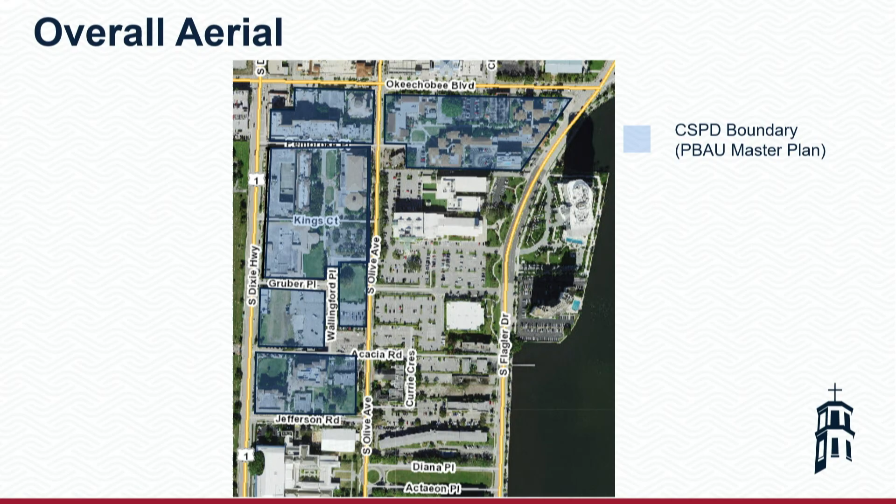We're all familiar with PBAU, one of the great assets of our city. They are part of a CSPD, a Community Service Planned Development, which is highlighted in blue, and the particular site within the CSPD is the one outlined in red. So as a reminder, City Commission approved a 25-story dorm to accommodate 990 students, an 11-level parking garage with 888 parking spaces, an increase in the student enrollment cap, 4 waivers, and the last bullet point is why we are here tonight.

The condition of approval requires a major PD amendment to, quote, improve the facade of the garage. And we have been working with staff since April, and we join with staff tonight with an agreed upon design, or largely agreed upon. A few issues for you to provide direction on, Mr. Chair.

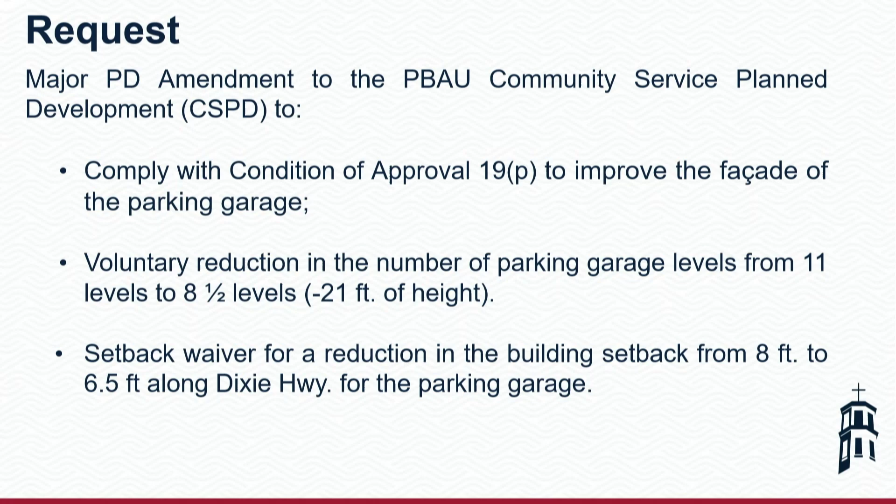Again, we are here primarily seeking direction on that facade improvement. Also, we are voluntarily proposing to reduce the height of the garage from 11 levels to 8.5 levels. That's a 21-foot reduction in the overall height of the garage. And the screening requires columns that are in an 8-foot setback on Dixie Highway that generates a waiver. So this is the site.

Let's talk about the design. So first of all, let me share with you what the geometric design element is on the garage. It is an ichthys symbol, which is also referred to as a Jesus fish. It's a symbol from early Christianity, it's been around since the 2nd century. It is elsewhere on the PBAU campus, as you know it's a Christian university, so there are many examples of this on the campus. In fact, it was the city's art life director, Sabile, who walked the campus and said, why don't you use that ichthys symbol on the garage, which of course we thought was more than appropriate. So that is within the geometric designs that you are about to see.

So this shows what was approved, what's being proposed, and the delta between the two, a reduction of 2.5 levels. We do lose 185 parking spaces, which does matter, and I want you to be aware of this. The reason the garage was designed at 888 spaces and 11 floors to begin with is because we have parking requirements with the city, and they were asking us to make the parking whole on the campus. The new business building that's topped out took away parking, this dorm project takes away parking, and we've lost on-street parking due to abandonment of roads.

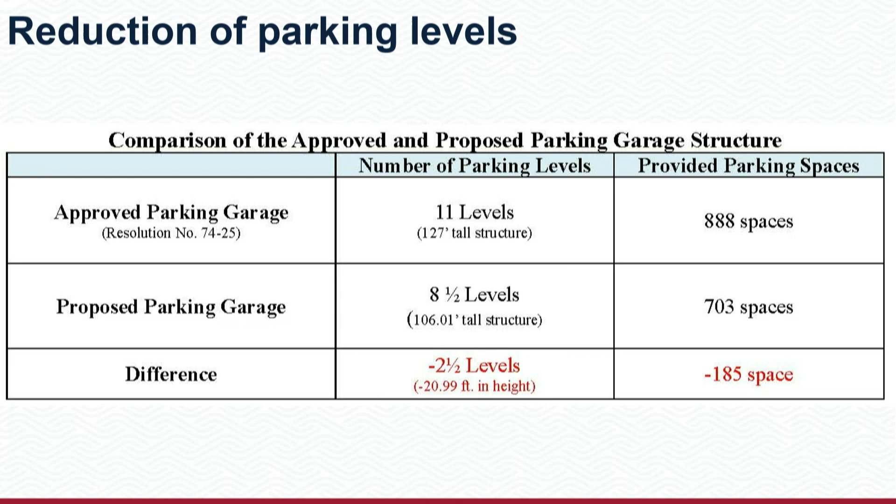So we're coming back knowing that we're losing 185 spaces. We're somehow going to have to make up for that elsewhere on the campus in the future. But we did want to reduce the height of the garage on Dixie Highway, which is very much in the public realm.

So the west facade facing Dixie Highway, this is the architectural treatment that has been proposed. And you can see the ichthys throughout the designs. Again, this was a recommendation from Sabile, which we think is a terrific design.

The north facade of the parking garage, which faces one of the side streets, and the south facade each have partial treatments. This is Dixie Highway. We've treated it about 2/3 of the way east. And then we have to leave open ventilation so that we don't have a mechanically ventilated garage.

Remember, this is a 100% affordable housing project. So there's a budget on doing this. This is not a luxury high-rise where we can put all the gingerbread that we want to. We need to make this as beautiful as we can within a budget for dorm rooms that students can still afford to pay the rent on.

Now, that is going to be a subject of discussion this evening because staff would like this eastern 1/3 of the north and south facades also ornamented or decorated in some way. And we think we've reached agreement on how to do that. We couldn't add to the budget, so we're going to rearrange some of the ornamentation so we're not paying for more of it and reappropriate it over so the entire north and south facades are covered.

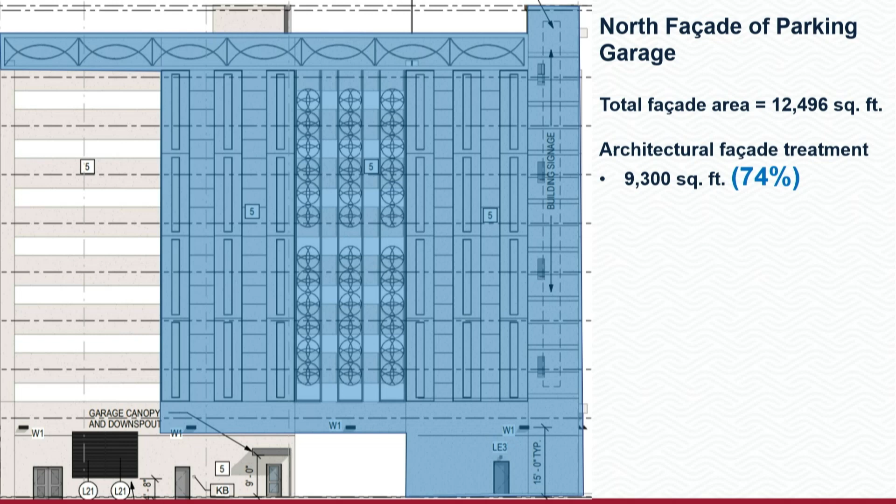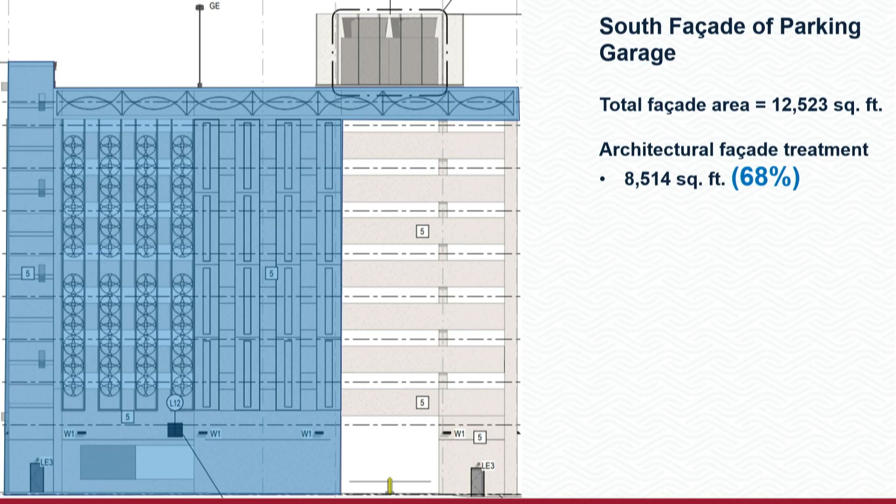Similar issue on the south facade, the eastern 1/3, which is the least visible from the public, by the way. You kind of need to be on the side street to see it for the most part. Everything in blue already has ornamentation. The goal tonight, or at least before City Commission hears this, is to satisfy staff that we're covering 100% of it.

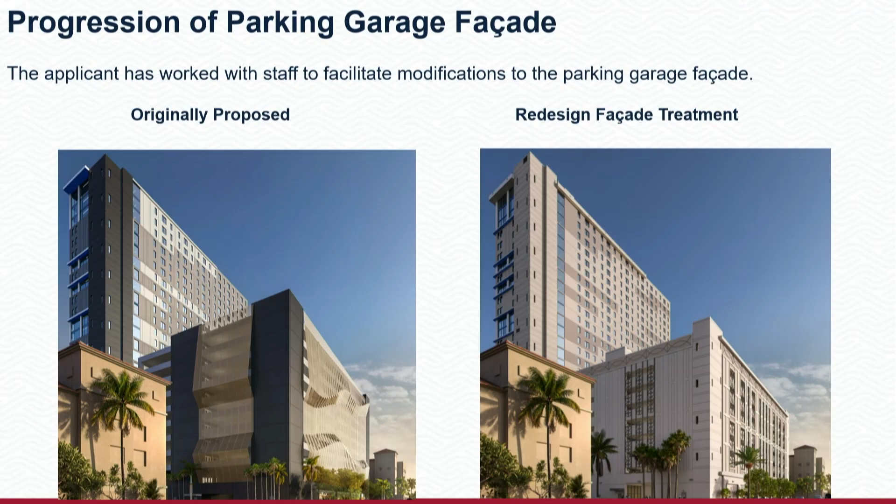So on your left is the original proposal that came to you, and there was a lot of commentary, including from this board and the City Commission, about what is appropriate decoration and coloring. On the right is what is in your package, which is lightening the colors on the corners, adding some holes in it, scoring, and this geometric design, while not enclosing the garage and triggering very expensive mechanical ventilation.

Here is another image of it. This is looking south down Dixie Highway, and this is looking north up Dixie Highway back towards the downtown. I can come back to any of these.

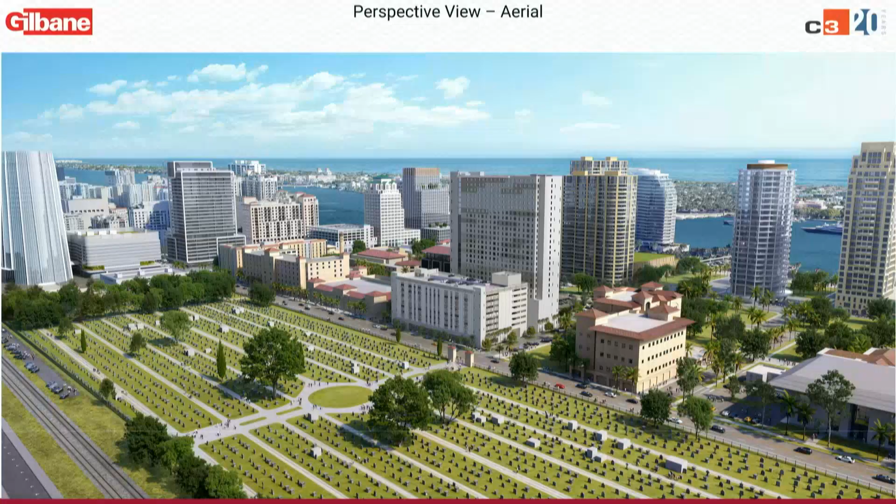This puts it in the context of the surrounding building height. If you look at the height of the dorms that were built a few years ago, the height of this building, it's about the same datum line between these buildings. And of course, we have more big buildings coming in the block to the north, not to mention the two South Flagler House buildings, the Forte building, and what will be two family church buildings under construction. So the height really wasn't a big concern except for the garage on Dixie Highway.

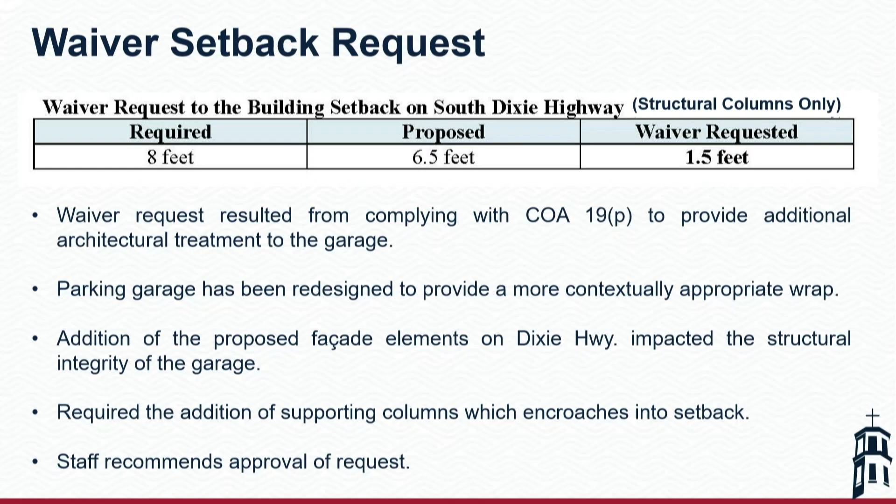The waiver setback request, which I'll better illustrate in a graphic—we have a required 8-foot setback. A few of the support columns are within that. It's in a landscaped area. You'll still have the same amount of landscaping, so whatever the required number of hedges were, you'll still have that. It's just there will be some columns in the middle of the hedges. This graphically depicts it better. So working left to right: Dixie Highway, then a landscaped area, then a 10-foot sidewalk.

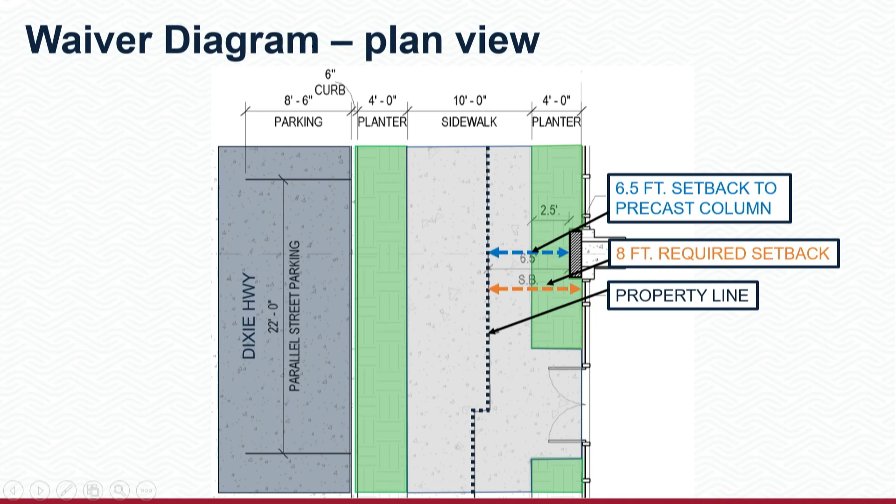None of that goes away, so the public realm is all the same. But in this 4-foot planted area, which is the second layer of landscaping before you get to the garage building, we are supposed to have an 8-foot setback. Where these columns jut out, we only have 6.5 feet at the worst point. There are lesser encroachments, but the greatest encroachment is 1.5 feet, and that occurs in about a half a dozen places.

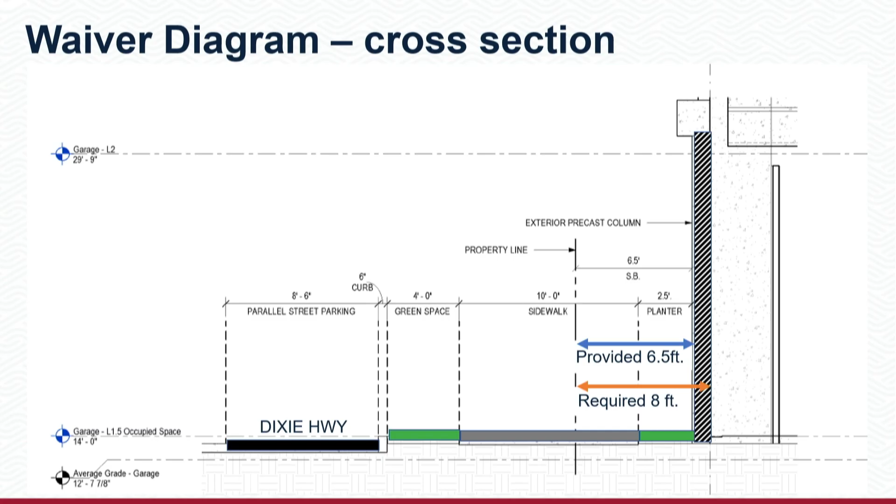This gives you a cross-section view of the same thing. It will not change the public experience on the roadway, the parallel parking, any of the landscape. The sidewalk's still 10 feet. The active use liner is still there, so the public perception of this will not exist.

So this is the Dixie Highway frontage. I'm sorry, I don't know why this keeps skipping around. This is the garage above, our active use liner on Dixie Highway. So Dixie Highway, parallel parking, 4 feet of landscaping, 10-foot sidewalk, what should be another 4 feet of landscaping, but where these columns come out to support this is where we're seeking the waiver. Staff supports it.

Now let's talk about the 3 conditions of approval that are in your package, and all of these pertain to the garage aesthetic treatment. The first one is that the staff wanted to extend the treatment on the entire north and south elevations, which we are committed to doing. We just need to find a way to do it without exceeding the budget that has already been set.

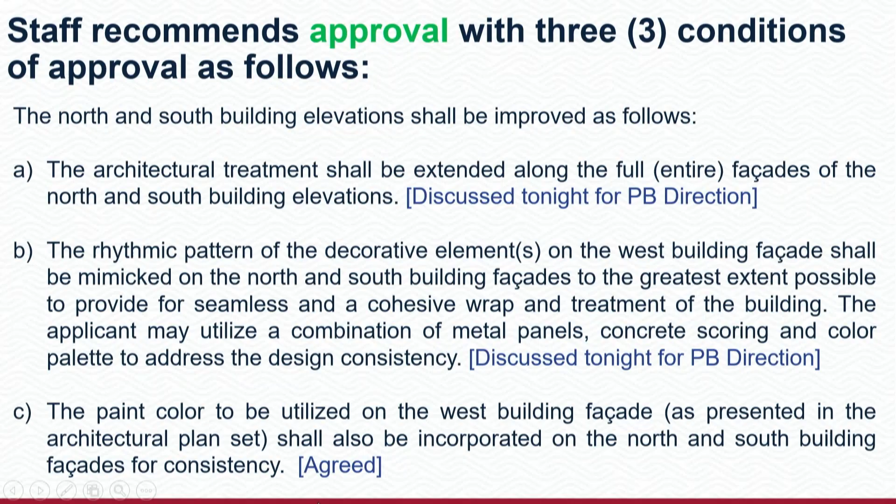Second is the rhythmic pattern, which I'm not sure we're in agreement with staff as to which columns of geometric designs get moved to where, but we will work that out before City Commission. Delighted to have your input on that, should you have any input. And condition C, that the paint color will be the same. We agree to that. That was always the intention. It just didn't always show up in the illustrations.

With that, Mr. Chair, we're concluded. Delighted to answer any questions you have. You may want to hear from staff first. Let's first see if there are any questions. Sam, any questions? Not right now, no. Debbie? Will, not likely to have questions.

You know what I'm going to ask about. So why the decision to reduce the 3 stories for parking? Was it budget reasons or? I don't know all the reasons, Will, is the short answer, but all of our neighbors supported the 11-story.

But I think we felt it was awfully tall in the public realm, even though we were trying to honor one part of the code, which is the parking ratio in the code. We're also cognizant that we want to be a good community citizen. We want to have an attractive campus, and it was feeling large. So we asked our design team, who's present tonight, if they could go back and redesign it at a shorter height, lose as few spaces as possible while they were doing this decorative condition of approval that we knew we had to come back for. And this is what they came up with. We hate to lose the spaces, but frankly, we think it looks better being 21 feet shorter.

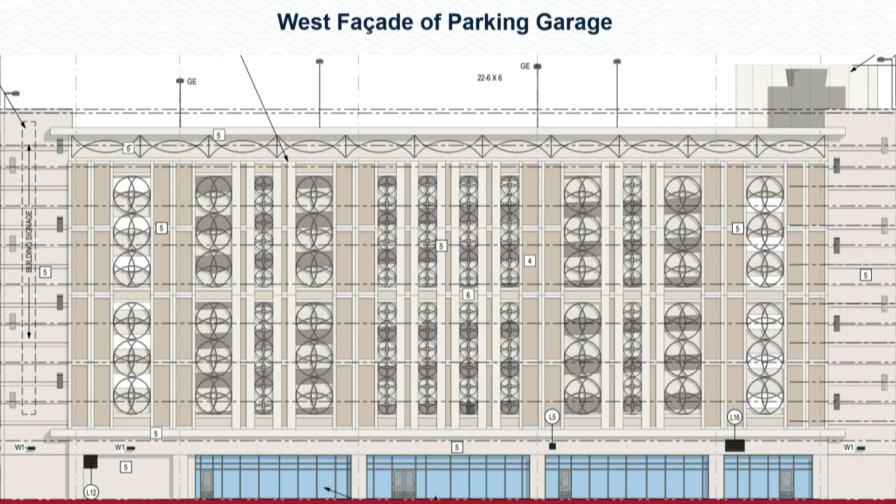Okay, my second question is relative to the waiver. I'm assuming, though it doesn't appear so in what's been represented, that the setback encroachment is not affecting the visibility triangles at the corners of the parcel. No, the columns are all interior to the west elevation. They're not at the corners. Thanks.

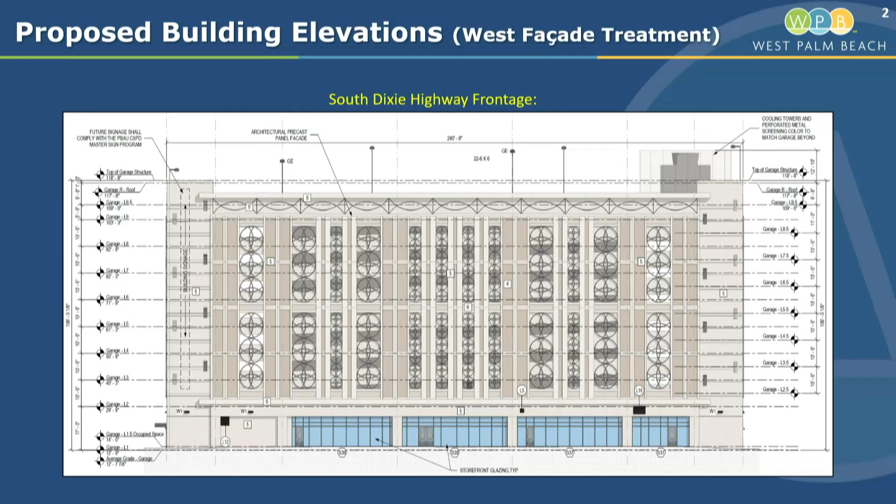They are using, as Mr. Mayfield questioned, these panels applied to the facade and the metal work that provides good articulation. Staff has worked with them but has some concerns regarding the treatment of the north and south facade. These facades are very visible as you travel Dixie Highway in both directions, and that's why staff has concerns about how the treatment basically stops at some point and doesn't continue across the facade. We recognize Dixie is probably the most important side, but we'd like some treatment that provides context to the entire building.

We have worked with them. If you look at the portion in the middle of the facade, it's a shear wall that is part of the structure, so this element won't have the precast panels applied to it, just scoring creating the pattern. We thought that could be a good option to not increase the cost they were concerned about, while still providing some articulation and context to the north and south facade.

At this point we are just requesting some conditions of approval so we can continue working with them on how to make this facade consistent. We have some ideas and have been back and forth with the architect, but we have not reached an agreement yet. The goal is to provide some continuity to the north and south. There were some discussions about maybe removing one of the elements on the west facade to be able to use it on the north and south.

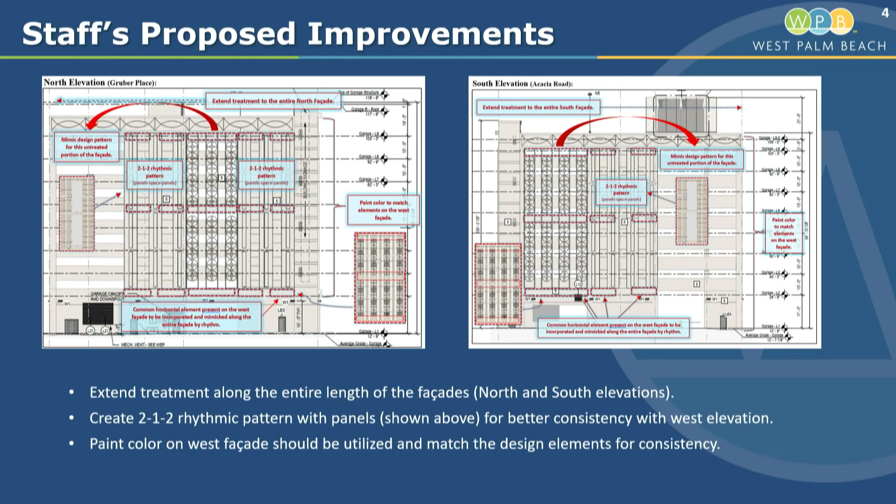And if the rhythm of the panels are more consistent with the west facade, we can work with that and provide a more complete look. So we would like to request some additional time, which is the reason for the conditions of approval. We offered some suggestions, but we have not really reached an agreement on how to solve this.

We support the reduction of the building height and the number of parking spaces, and we support the waiver request for the building setback. That's some give back for the treatment they are able to accomplish. But the north and south facades are where we're still working, and would like a little more time to resolve it before it goes to City Commission. We're looking forward to the board's perspective, but staff's intention is to have a complete building so it looks like a full volume.

The recommendation is approval with conditions. Staff believes it complies with the standards in Section 9432A and Section 9435C for design qualitative development standards. We have, as mentioned, three conditions we would like to recommend for approval so we can continue working with the applicant. That concludes the staff presentation.

Okay, thank you. Debbie, let me start with you. Any questions? Sam? Is there any treatment on the garage on the elevation that faces east?

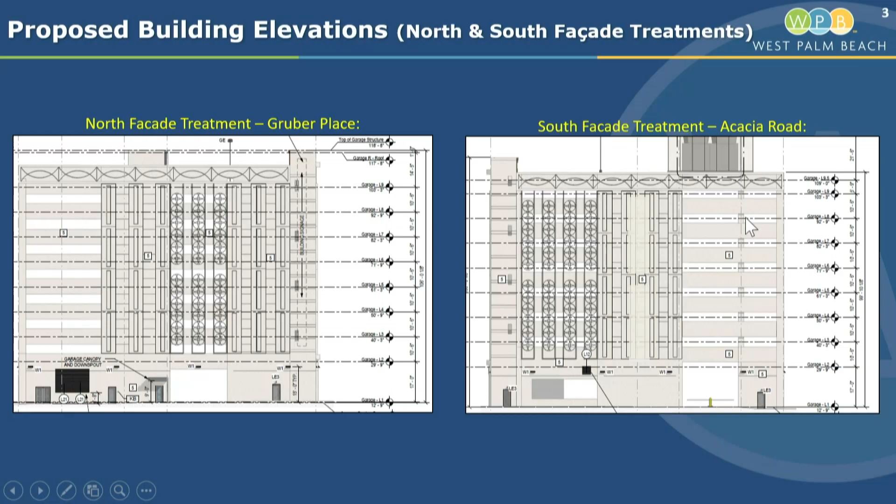No, I believe it will just be like this treatment here, right? Yeah, so it's facing the building, totally interior to the project. So they are having just this, basically the crash wall and nothing else on the east elevation. It's attached to the building, or it just faces the building? It's separated, so there's nothing on that wall. It's a service road between the garage and the residential. Okay.

Was there, maybe that's a question for the applicant, but was there a reason why the application was changed from the original design to this design? Was that a city request, or was it something else? You mean the original treatment of the garage? The garage design, well the facade treatment on the garage, was that the city requested that it be changed, or was that something the applicant changed on their own?

The city requested it. It was a condition of their approval that they had to change it. You mean this one? Yes. So this is what was shown, I think, to you. I was not at that hearing, but it was shown to the city commission.

It had sort of this wave feature, and the city commission approved the 25-story dorm, the 11-story garage, but said we're not sure we love this screening. Will you please work with staff and come back at a later date with something that looks different? We weren't sure what that was, quite frankly. It's in the eye of the beholder, but they did not love it.

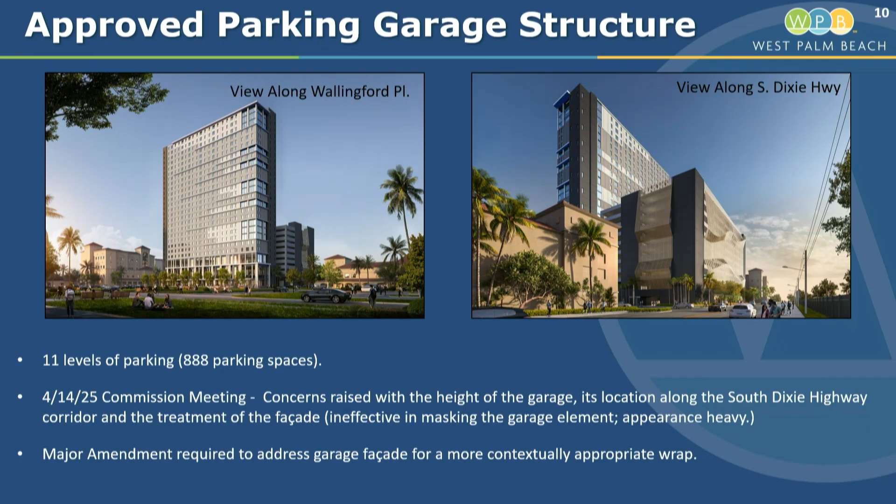So we worked with Sabile, the city's art life director, and asked her for her suggestion, and she came up with what is before you tonight, which we actually like much better, and so does staff. So if you're asking why we did not present that in the first place, we took a standard garage screening and proposed it. But we've always been open to a different design. We just need to make it affordable.

Got it. Yeah, I just didn't know if it was the city's requirement or whether it was just changed for other reasons. I wouldn't call it a requirement, it was city staff's suggestion. And we worked back and forth with them, and we're happy with it. They're happy with it too. But if you're asking where did this original one come from, I think it was more of a standard garage screening.

And the city wanted the screening, and so did we, to somehow be related to Palm Beach Atlantic University, not an off-the-shelf one that could be in any city in America. We had even thought about putting the sailfish, which is PBAU's logo, but I don't think anyone wanted a giant sailfish on the side. So this is what we came up with. Got it, okay, thank you.

We have staff back, thank you. Thank you, any other questions of staff, Sam? Yeah, I was just curious, I'm sorry. Okay, go ahead. The space in between the parking garage and the dormitory, you said that's a service road, is that right?

Yes, okay, that was my own, just wanted to clarify. Thank you, Will.

Going back to the previous pictures, it looked like there was significantly more open space for airflow, so I'm a little confused. Are these panels all solid concrete on the facades? The center panel has always been a solid panel, and the two sides are the crash wall for the cars, with the space between the slab and the crash wall always open. The treatment will remain the same, it's just the metal work applied to it.

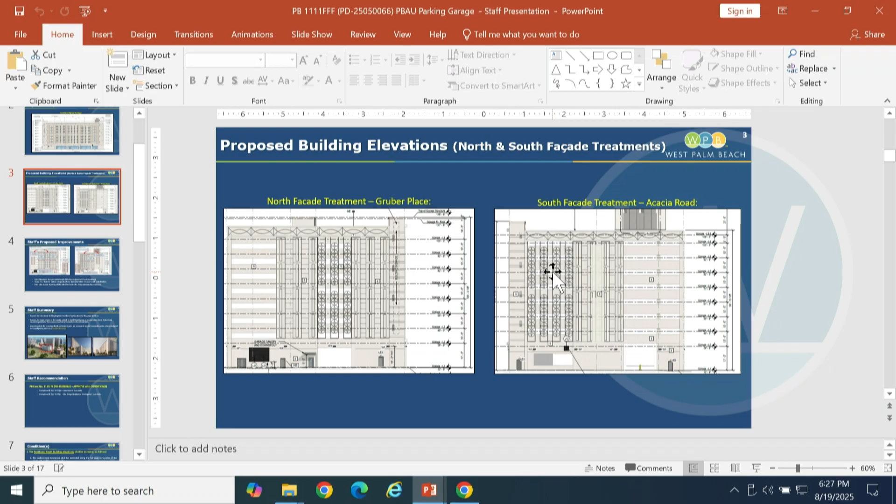So in your condition for approval, it says full on the north and the south? Full means we want treatment all the way to the end. Here you see some metal decorative elements, and we're working on scoring lines on the center panel that mimic the treatment on the west elevation. Something needs to be done so the facade looks complete, not stopping halfway. That could either be decoration or mounted panels. I think the idea will be decoration, not to reduce the flow of air.

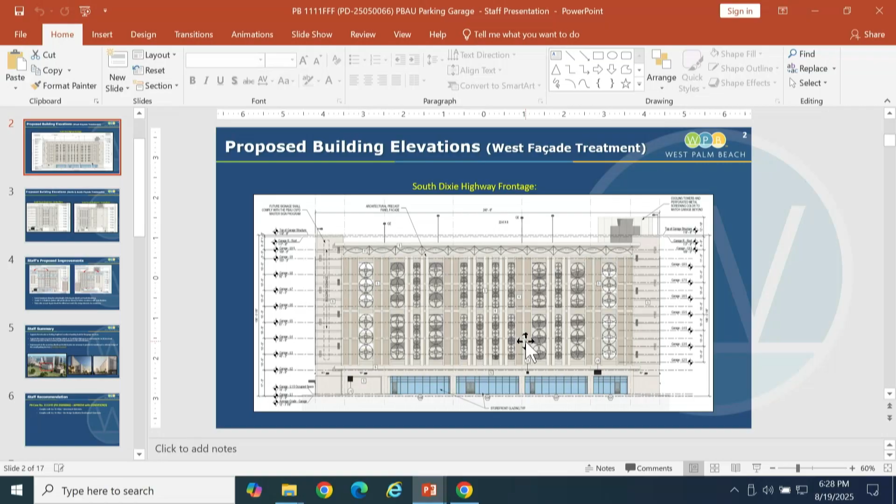So how do we space those? Would they have to incur the cost of creating those fish-style patterns for the entire side of the structure? That's what we're trying to work out, with the idea that they don't have to incur the cost of creating new panels. Some options were using these to distribute throughout the entire facade, and maybe remove, for example, this one in front on the west, which we think won't impact the overall appearance, and distribute to the other side to create a more cohesive front. So we need a little time to work it out.

We don't want to do something that brings down the look of the west facade. So we want to try to distribute it, that's why we're talking about the rhythm of the scoring lines on the solid panel. We make them a rhythm consistent with the west, which looks better, and maybe if we add the decoration, the metal elements, in a certain pattern on the north and south, that will be sufficient with what we have to complete the whole design.

So right now, across the street from the spot is the construction trailers, and it looks like some sort of air conditioning mechanical equipment. Is that area going to be developed at some point? Eventually, yes. So that side of the building won't necessarily be as visible a few years from now? Yes, so that's why we're saying it's not as primary as the west, but it's still visible and will be impactful. So we're doing a lesser degree of treatment, but still something.

On the north side there's a service alleyway, and then the beginning of the dorms or the library. But you have an 8-story building just to the north. This yellow structure to the left. How many stories is that? This building, it's a gym with a second floor, so it's a large structure, not a 2-story building.

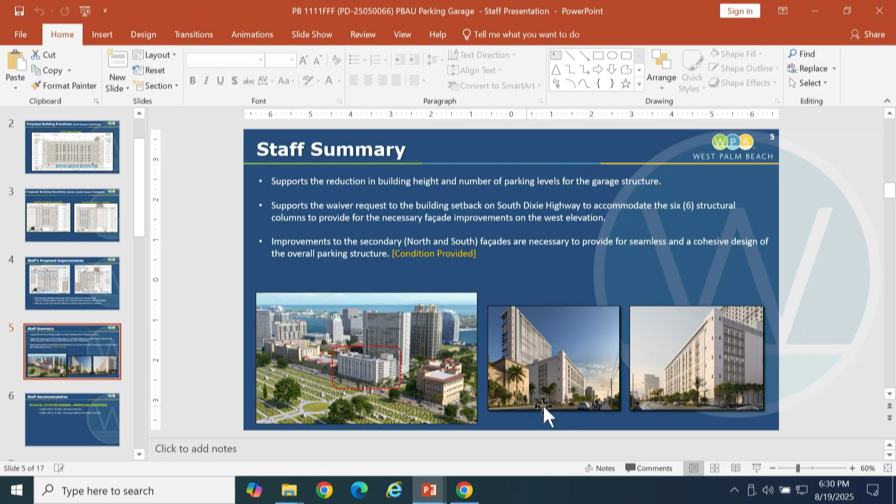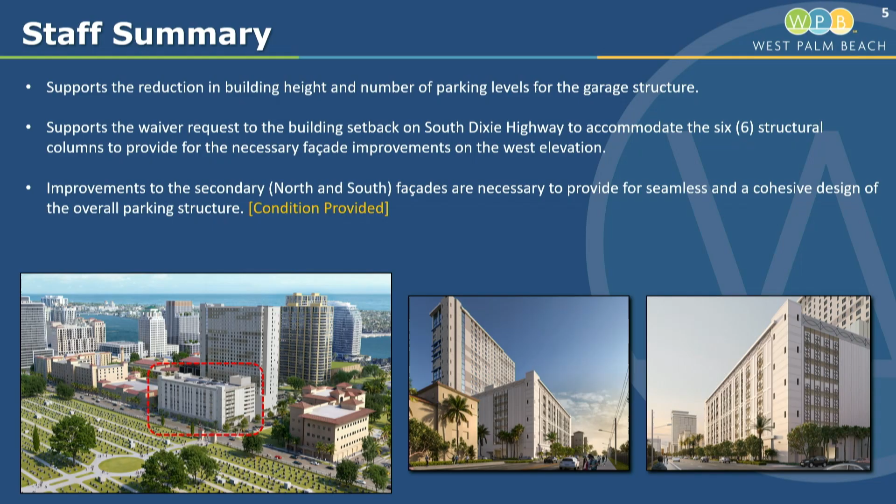Okay, so I'm just trying to think of line of sight, driving down the road at 35 miles an hour. How important is it for the entire side of the building to be decorative versus it being a want versus a need? And what's going to happen a few years from now, especially on the south side, when that lot is potentially developed as well?

So just sticking on the word full, if it's predominantly, but it sounds like you guys are open to compromise. Can I direct a question to Harvey? Let's, this is a chance to ask questions. I'm sure we'll reserve time to answer any questions at the end, but let's stick with the questions of staff.

Okay, any other questions of staff? No. All right, Patrick. Jean, I have a question.

It sounds like the applicant is more than willing to consider a lot of these ideas so long as the overall cost won't go up. Is the staff comfortable with that constraint? In other words, do you believe without increasing the cost, you could come up with a better outcome?

We will do our best. We can work with that.

Okay, well, I think that's important because I think we give the direction that we want them to continue to work with staff, at the same time cognizant of the need not to increase the cost because of the bond financing. I share some of Will's concerns that I would hate to see the west exposure, which looks very attractive, diluted too much for something that may ultimately not even be visible.

Okay, I mean, these are the trade-offs. I know you will balance all those, but his concern is one I would share as well.

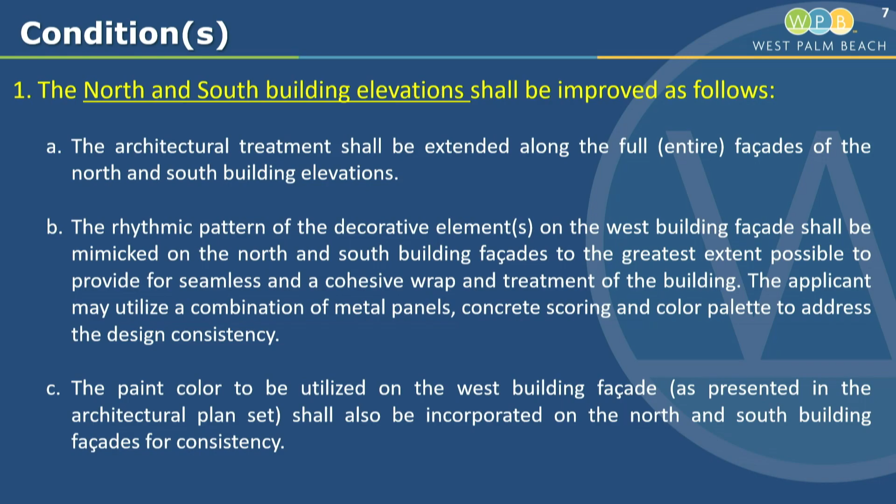Okay, so we're looking for a motion then. I'll make the motion. Okay.

I move that the planning board recommend to the city commission approval of planning board case 1111FFF, PD 25050066, a request by Joni Brinkman of Urban Design Studio on behalf of Palm Beach Atlantic University, Inc., for a major amendment to the Palm Beach Atlantic University Community Service Planned Development, modifying the parking garage structure approved by resolution number 74-25 by reducing the number of levels for the parking garage structure from 11 to 8.5 levels, revising the garage facade for a more contextually appropriate wrap, and a waiver to the building setback along South Dixie Highway.

The motion is based upon testimony presented at the hearing, along with the application submitted and the staff report, which constitutes competent substantial evidence. The planning board hereby makes a finding of fact that the application complies with the required standards in section 94-32A and section 94-35C of the City of West Palm Beach zoning and land development regulations. In addition, this recommendation is made subject to the conditions of approval contained in the staff report dated August 19th, 2025.

With the further condition that letter A is modified as follows: the architectural treatment shall be extended along the full entire facade of the north and south building elevations, provided it does not increase the current budget as allocated for the parking garage. I move that these conditions, and then condition B and C, shall apply without modification.

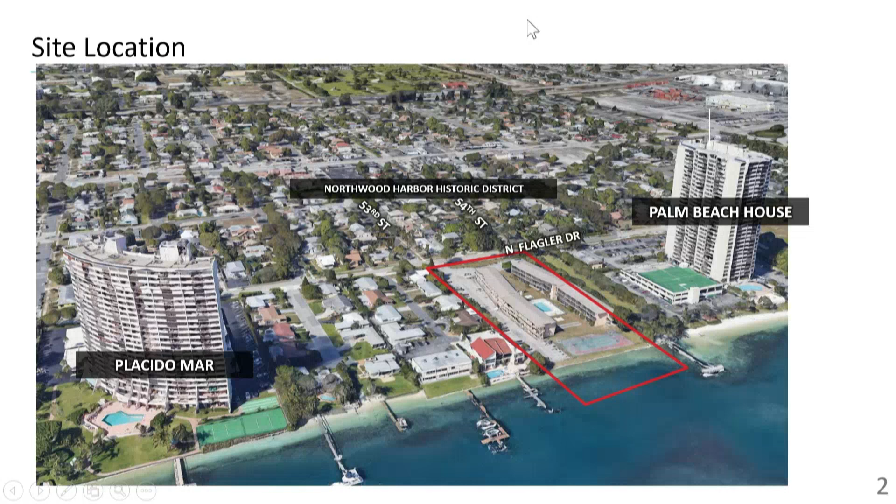So just a quick summary of where we are and the requests specifically in front of you this evening. This is a rezoning. The underlying zoning here is multifamily 32, 32 dwelling units per acre. We are not requesting any additional units than what's allowed in that zoning district.

What we're asking you to do, which you've done on other projects up and down that corridor, is a residential plan development, an RPD. In that RPD, we are asking for a formal level 2 site plan, and that has basically 4 waivers associated with it.

So a little bit about Great Gulf, who's our client here this evening. They're in the audience. They are a Canadian firm. They also have a significant footprint all over the United States, including owning a home building company called Ashton Woods. But here in the city of West Palm Beach, they are not new. In fact, they were one of the pioneers of the Renaissance we're seeing now. Way back when, many of you will remember the 1515 building, it was called the Modern.

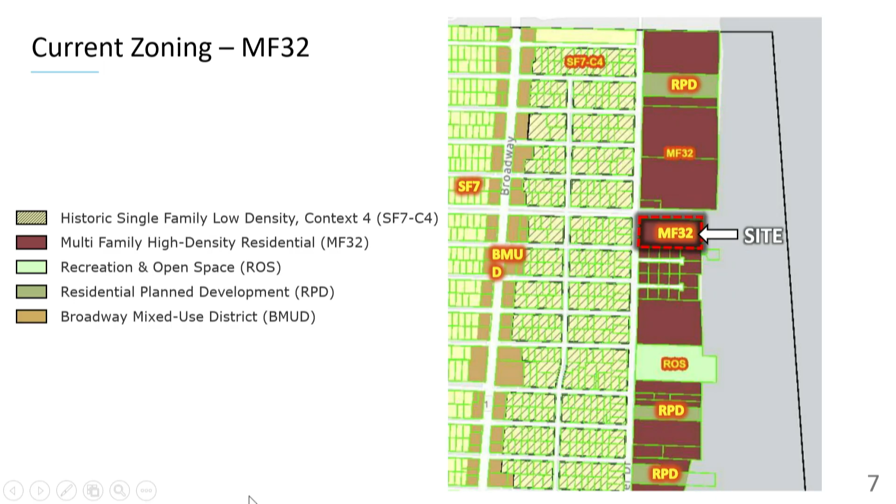The zoning on the site today, as I said, is MF32. The request is to change it to RPD, or Residential Plan Development.

This is the development program. Existing today are the Poinsettia apartments, constructed back in 1966. There are 2 3-story buildings and 72 units. Our proposal is to go to 97 units in a 31-story tower.

Now, the addition of those 25 units are allowed under the zoning regulations. We are not requesting a land use change or an upzoning. We're requesting to use what is out there or allowed today.

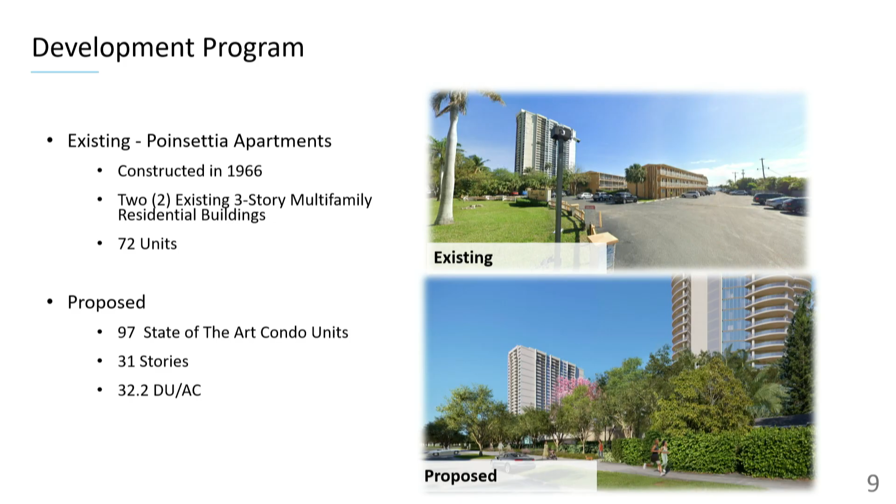Starting on the left-hand side is the Palm Beach House, which sits at 31 stories, 280 feet. Our proposed is 31 stories, and then immediately to the south of that is 26 stories for Placido Mar. And then you'll note Apogee, which is already approved at 235 feet, and Olara, which is under construction today.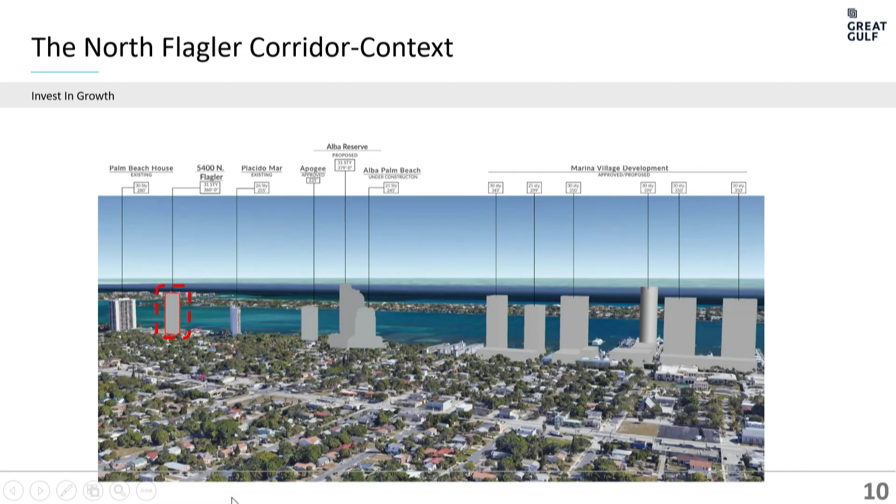Well, give Great Gulf credit. They said this lot is 220 feet wide, 600 feet deep. We could do something different. Mr. Safdie said, well, let's not look at the way this goes. Let's do a podium, maybe a 2-story podium, and not do internal ramping within that podium so we keep the height down. So that was the design we started with.

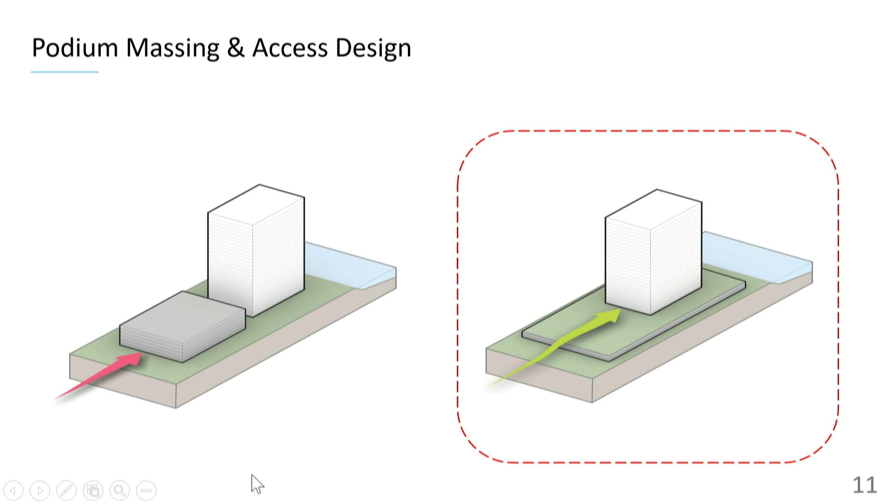Then we looked at, okay, what is allowed today under the zoning, under MF32? On the screen in front of you, on the left-hand side, is a by-right building that can be constructed. It's 150 feet of height. Ken, how do you get a building 150 feet of height in MF32? The answer is simple: it's a 220-foot wide lot. The way the code works, you take the height of the building, you divide by 2, and you have to have those setbacks. This building is 70 feet wide. It could be 150 feet high. So that's what's by right.

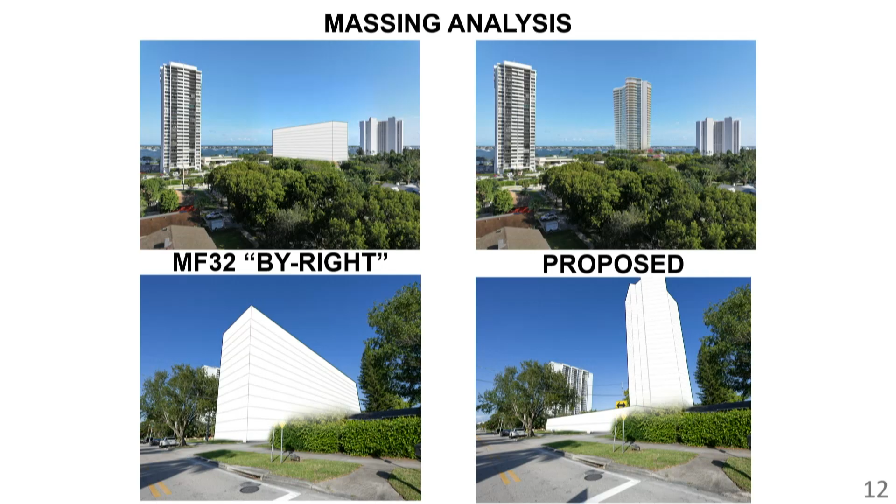On the right-hand side is what we're proposing. Different, slender, a taller building, obviously, at 360 feet, but a unique design. Now, these are just massing diagrams. I'm going to walk you through the details of the actual building itself. So this is the first slide of the building itself.

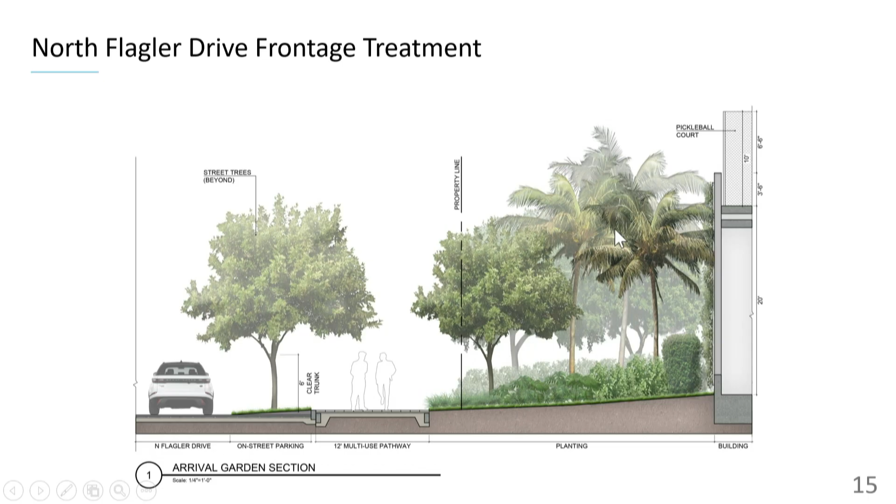My purpose of showing you this is we can put a significant amount of landscaping to address staff's concerns. We're absolutely happy to make this a green wall so that blank wall concept won't be there. We don't think it would be seen with the amount of landscape we're proposing, but of course we're willing to make it a green wall. Our client was very considerate of that and certainly said that made sense.

It's also important to note we're providing a 12-foot multi-use access, a pathway throughout the site, consistent with the vision for that north area. The residents are excited about having a wider pathway. That pathway will also have a significant amount of shade. That's our approach - we're going to make that a comfortable walkway with shade and make sure it's very comfortable for folks to walk on.

This is the building itself. It is 360 feet of height. The building consists of 31 floors. As I indicated earlier, 2 floors are parking down here. There are townhomes, one on each side, that actually start on the ground floor. And then here's the building itself. Its slab-to-slab height is 11 feet.

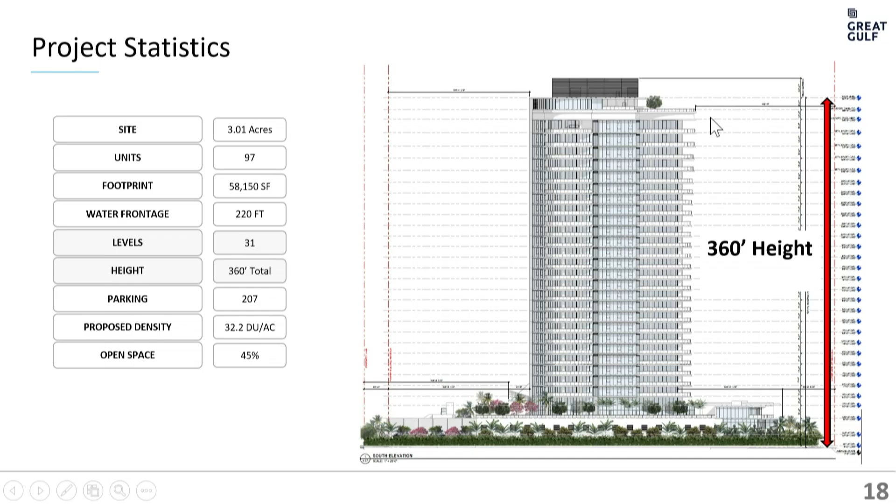Also you'll note the setbacks to the tower element - 170 feet from the front, 143 feet from the back. The building itself meets the RPD requirements of 20 feet, and then we have the setback to the north to the tower element, which is 30 feet. Now I need to let everybody know this building does get a little bit wider as it gets taller - it gets about 8 feet wider, and it's a consistent growth of the building. It's just a neat design.

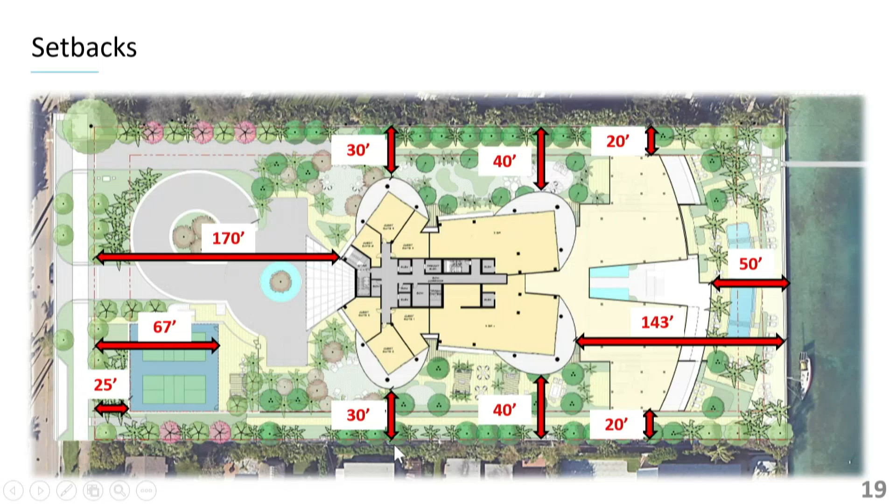And so here are the elements, and these, by the way, are measured to the balcony - a 30-foot setback from the southern property line here on the west side and 40 feet to the eastern balcony.

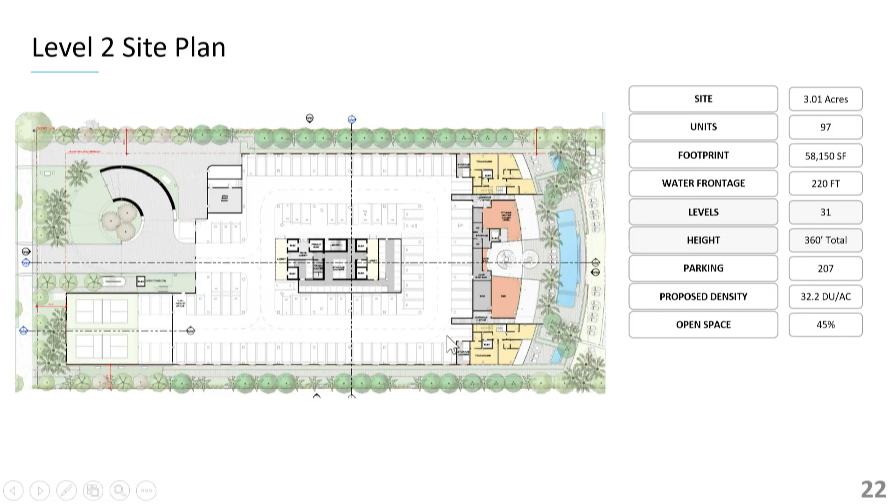This is level 2, or the arrival area. You go around the roundabout, work your way through to the arrival area, and then you go to the valet area, and then this is the main entrance into the building.

It's important to note on this slide - I'm not sure what you call this, but the tower itself, I use the word a onesie, but I don't think anybody will like that. But when you look at the tower element itself, it kind of looks like a little kid's clothes right here. And that's the tower element that we're proposing, and it goes up to the top.

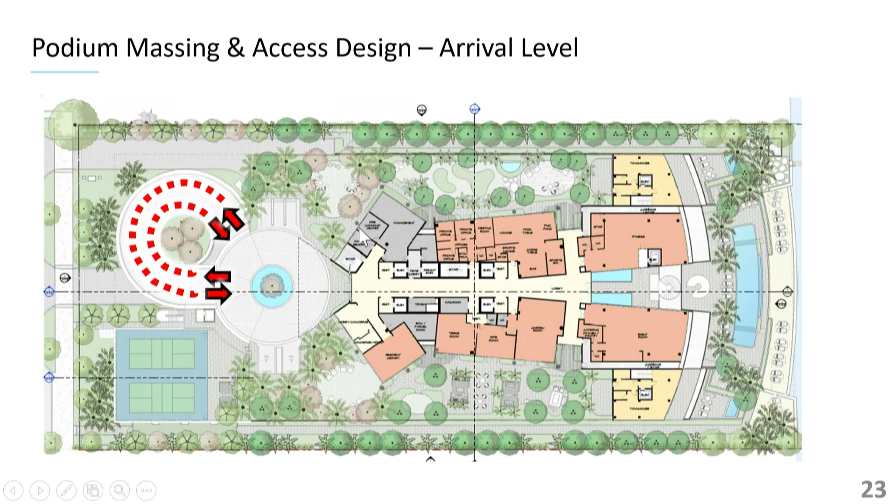And I don't think my client appreciated that term.

So we'll move on to level 5 as we move up on the podium. The podium here starts with level 4, and then after that it becomes a tower. They just build on top of each other. Each floor plate is not the same; there are different floor plates throughout. The top floor is an amenity deck. So that's the building itself.

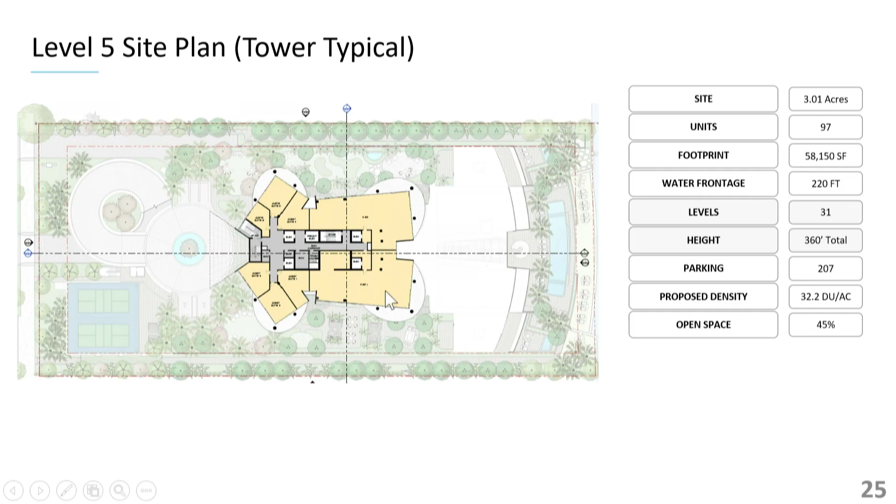So on to the landscape. We have a significant amount of landscaping proposed on the site. On the north side against the park, we meet the code requirement. On the south side, we double that code requirement. On the west side, we are an additional double plus some. We've met all the code requirements for planting, or have exceeded those requirements.

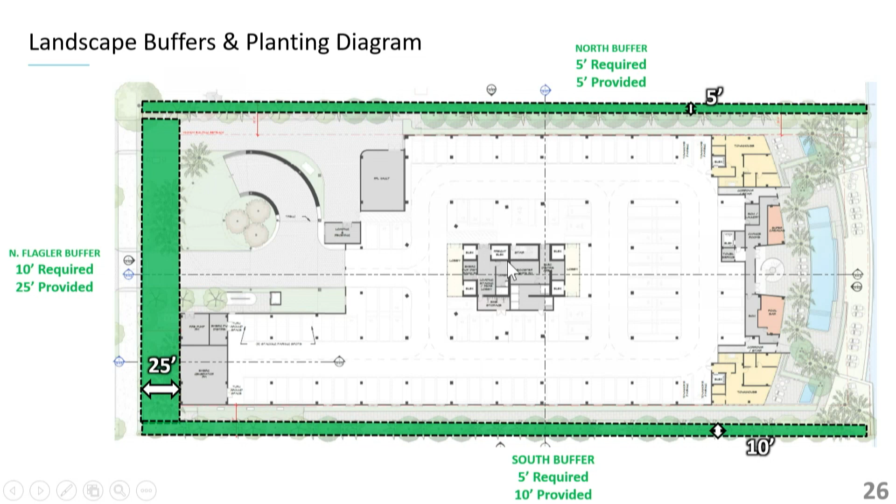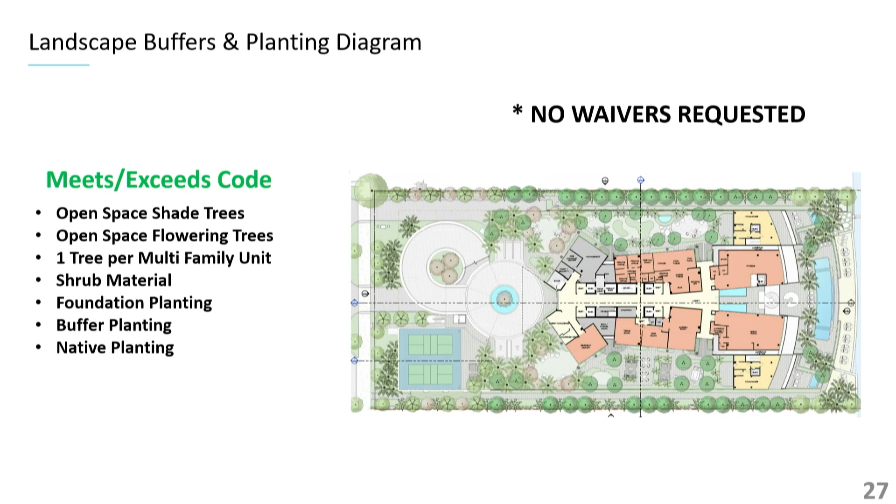It's important to note on the south side, we have a tremendous volume of landscape in regards to providing buffers to our neighbors to the south. That landscape involves a row of birds of paradise all the way through, and then a tremendous volume of landscaping and trees that our landscape architect can walk you through, or I can if you have any questions. There are no waivers requested for landscaping.

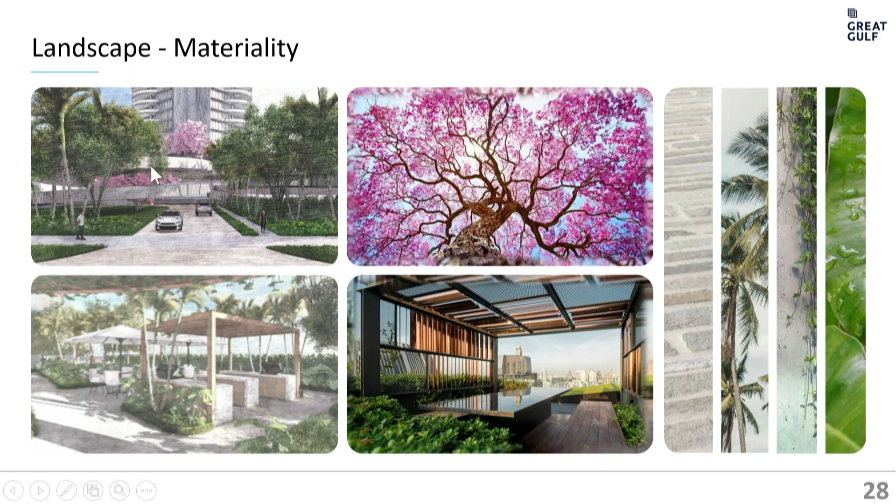Materiality. We're still in the middle of design for the materiality of some of the unique features of this type of building, but our landscape architect is here and can answer any questions you have. There's going to be a very significant amount of landscape and hardscape that are part and parcel with this project.

Again, just to show you the slide from the sidewalk from Flagler, to give you an idea of the level of landscape that's being proposed.

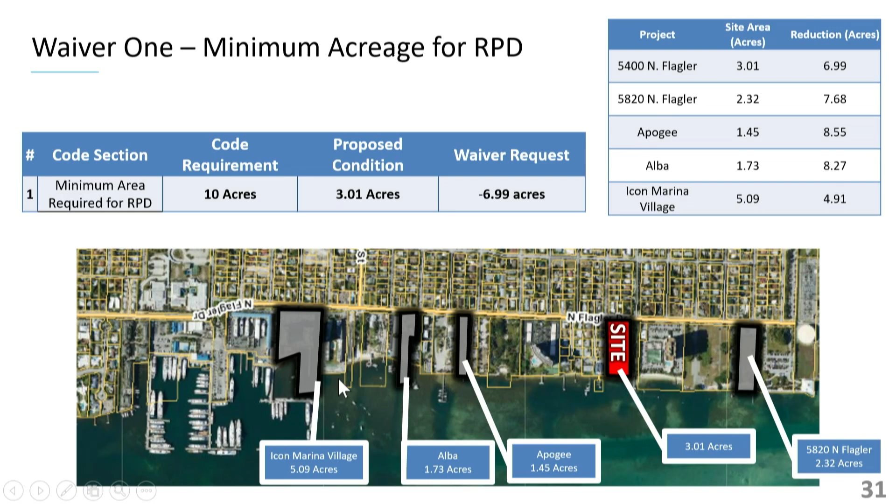Waivers. We have 4 waivers. I'm going to run through 3 of them very quickly and answer questions at the end. The first waiver is a minimum acreage requirement of RPD. That requirement is 10 acres. In the course of my career, I think there's only been one RPD that's actually met that criteria. Our request is a waiver to allow a reduced acreage for an RPD. Our site is 3.01 acres. You'll note on the bottom comparable projects and comparable sizes, and your staff recommends approval of this waiver.

Waiver 2 is the submerged land density calculation. The way your code works, if the land area is greater than 2 acres, we can request 100% of the density for the submerged lands. We are making that request, consistent with what you have done on other projects, and that's what your code allows. This site is 3.01 acres.

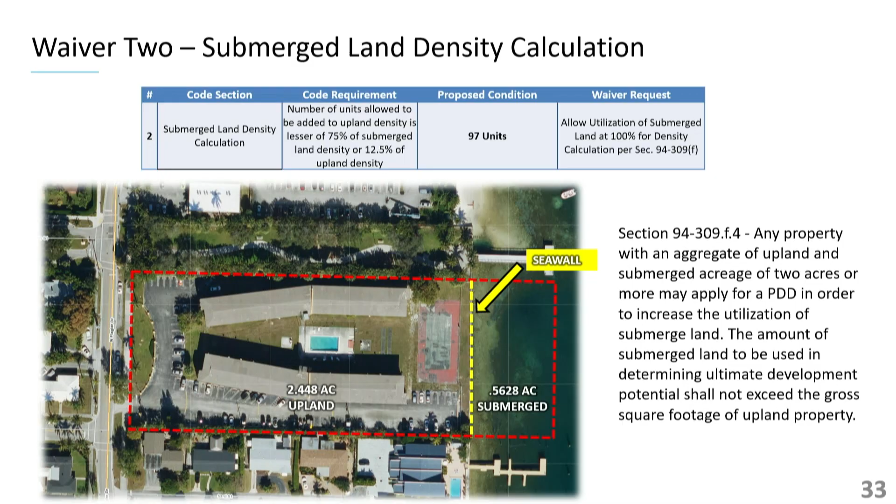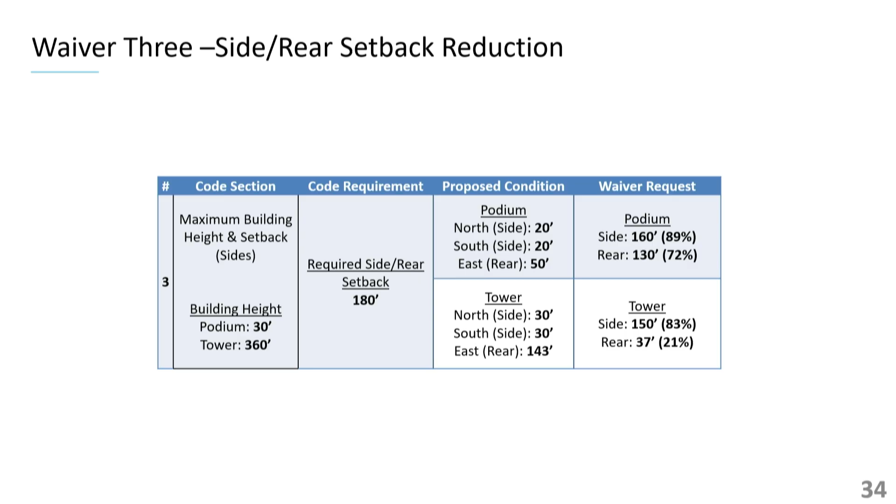Waiver 3 — I'm going to spend some time on this because this is what equates to height. It's a side and rear setback request. So what you do is take the height of the building and divide by 2; our setback requirements are based on that. Our proposal is broken up, and the way the code actually works applies to the building itself — it doesn't differentiate between the tower element and the podium. I'm going to differentiate between those two because that's an important distinction for the design characteristics.

Number 1, the residential plan development buffer around the project is met, so we meet the RPD requirements. Now, in regards to the front setback along Flagler, we way exceed that setback, which I believe is 25 feet — and actually it's 20 feet, and we exceed it by 5 feet to the pickleball court and the 1-story mechanical room, above which is the pickleball court. On the east side, off the seawall, we're 50 feet to the podium, and 143 feet to the tower element — a significant setback off of the water. Yes, it is a reduction from the code, but it's still a fairly significant setback off of the water.

North and south are both the same. On the north side, we have 20 feet to the podium, and 30 feet to the balcony of the tower element. That's consistent on both the north and south sides.

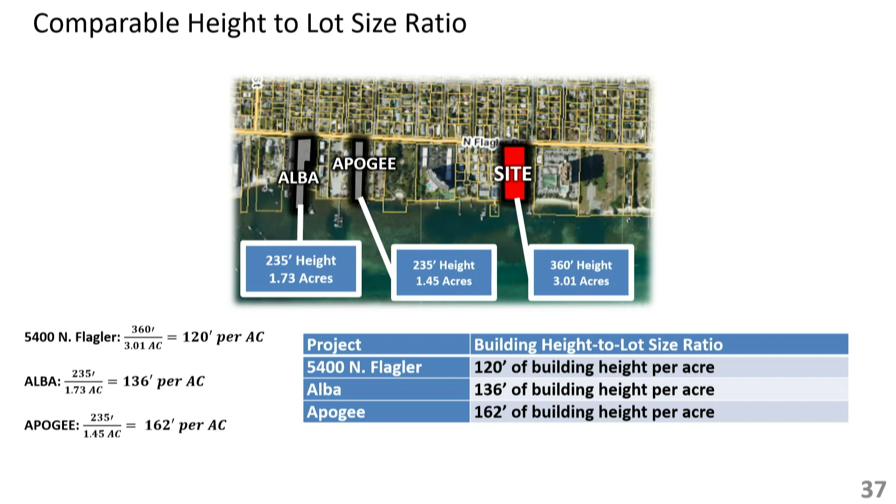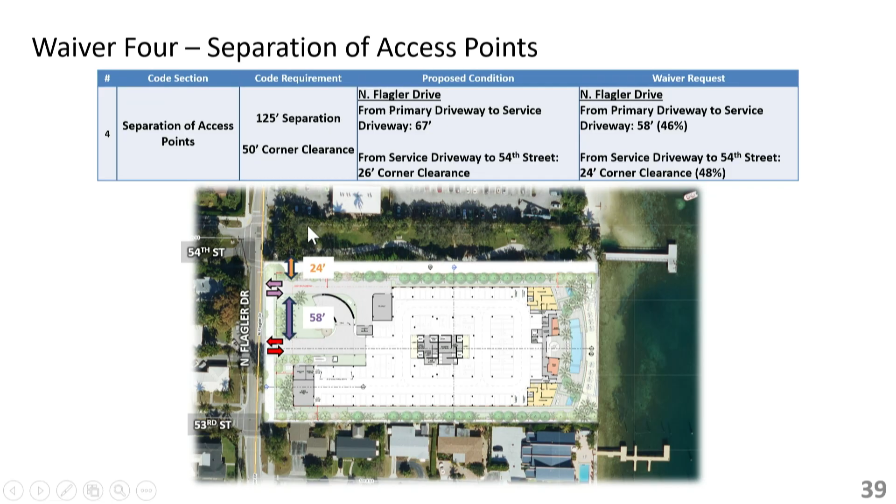Waiver 4 is a separation of access points, consistent with what you've approved on many projects. We are requesting 2 access points; there is 1 today. The purpose for the waiver is the drive to the north is closer than 50 feet to the park, but it's the appropriate spot for it. It provides service and loading, and because we're asking for 2, we have to have the minimum clearance. So that waiver also has staff recommendation of approval.

And these are the details. I'm going to click through this to keep it moving.

Community outreach, an important part of every project. I give our client a lot of credit -- they worked really diligently through this. In fact, even yesterday we had a meeting with the board at Palm Beach House. We've been working very diligently on this. Not everybody coming up tonight is going to be happy, but I can tell you that we tried, and we were able to reach agreements.

So first, we've met with the Palm Beach House, the Chamber of Commerce. We spent the most time with Northwood Harbor Association -- I'll let Ms. Ogburn talk about that and the support letter we received from them. We also held meetings with nearby residents. This has been an ongoing project, and the project has changed because of this: it's dropped height, we've relocated the loading, we've done lots of different things along the way.

So we have a letter from Mr. Ziff of the Chamber. We'll also let Ms. Ogburn get up and talk about the support from the Northwood Harbor Association.

Innovative land planning -- last slide, I'll get this done. We have lots of different things to talk about on this project: an expanded 12-foot pedestrian pathway along Flagler Drive, significant enhanced landscaping, integrated parking structures that minimize the podium massing, external driveways and circular access driveways which remove those vehicles -- an important point for our neighbors -- working collaboratively, and four-sided architecture by a world-class architect.

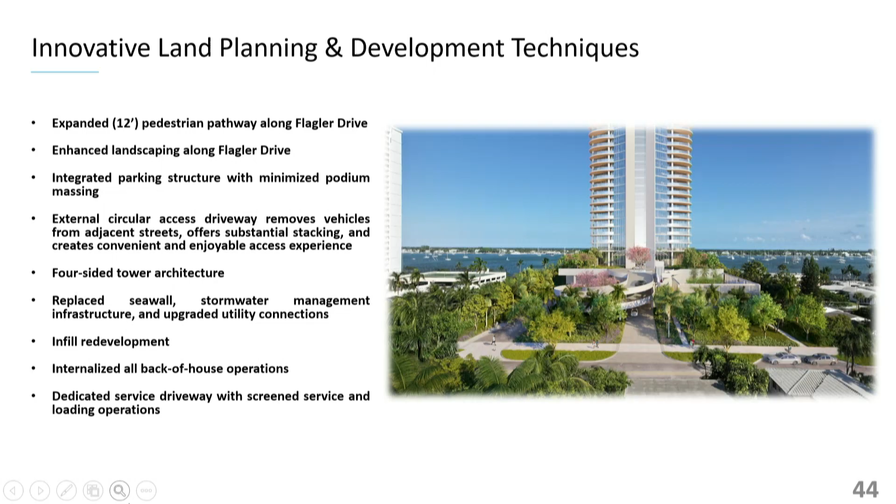We have infill redevelopment as part of it. We've internalized all of our back of house, we've got this dedicated service, we screened it and placed it to the north. We've also agreed to have a significant amount of security within this facility, including cameras, and we'll continue to work with your police department if desired. Some cameras would face out at the park, since we know working with residents there have been concerns about activities within the park. We are certainly happy to help - I know our client is all about doing that.

That is my presentation for today. I would ask that I have the opportunity to rebut, which I brought up first, number one. Number two, we have our whole team assembled, and we respectfully request your approval to City Commission. Thank you for your time.

Thank you. Jean, let's start with you - any questions of the applicant? No questions. Patrick? Will - of course I have questions.

I call it the samurai suit - the samurai suit laying down. You have 170 feet setback from the road, 143 feet from the shoreline. I like the samurai suit. What's the difference in footprint of the building between the 170 and the 143? That's a great question - Mr. Spina's going to look that up, and I'll guess, because I don't know off the top of my head. I want to make sure we give you the exact answer. Your question is, what is this distance from here to here? Yes. This distance is about 550 to 560 feet. So 170 minus 143 - somebody help me out in the audience. We will get you that answer. But you're saying 560 minus 170 minus 143? Yes, sir. Okay.

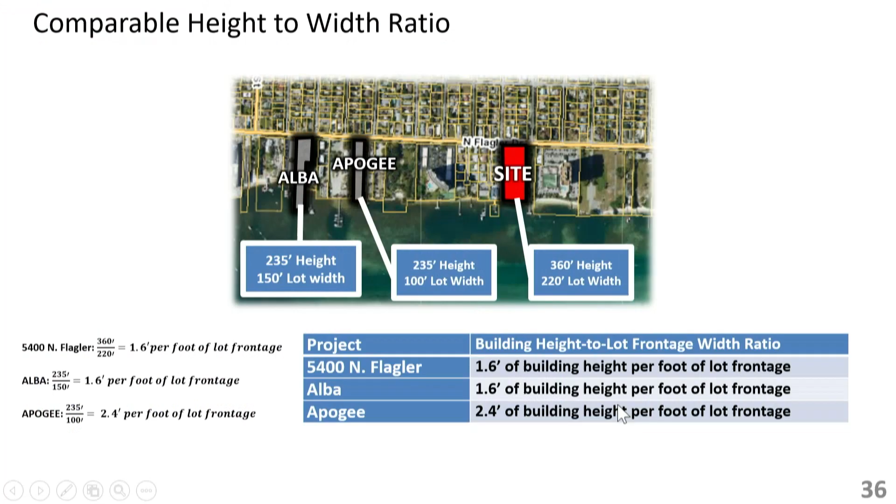Debbie, any questions? Sam? Small detail question - you mentioned on the samurai suit slide, go with samurai, okay, onesie, his samurai suit. So the southwest portion is 30 feet setback, and the southeast portion is 40 feet. Is that because the building flares up as it gets taller? Yes, sir, that's how it's done - at the height, at the peak. As you go to the bottom, it's actually 8 feet further inset, but we want to make sure we tell the story. At the first level of living, where you'd find an apartment, how far would those apartments be from the side setback? In round numbers, 38 feet. So when integrating with the neighbor on the side, it would be roughly 38 and 48 feet? In round numbers, yes, sir. I don't want to promise it's 100% accurate, but very close - it grows 8 feet, and I believe it is actually 38 feet the more I think about it. Okay.

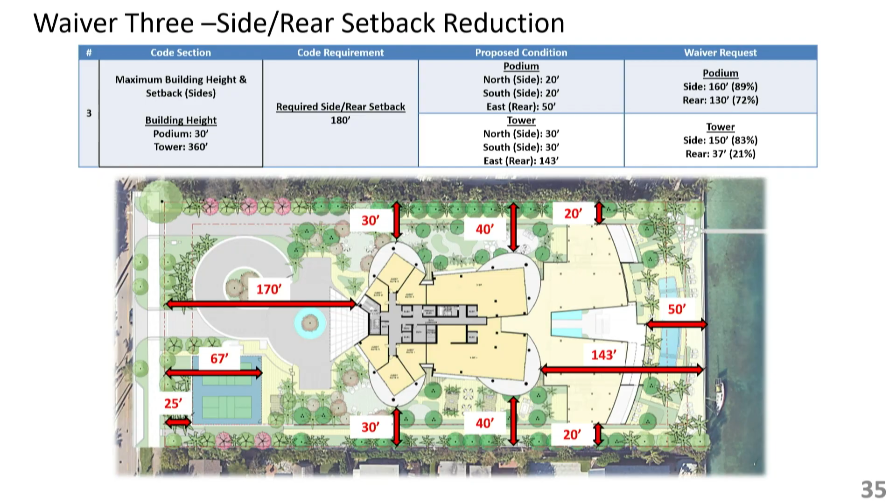No questions at the moment. Okay, TK - yeah, I had a couple of questions.

The pedestrian access points, do those go all the way to the water on the north and south side? I think the answer is, well, I know the answer is yes. Okay, it goes to the amenity area. Is there an open and close time for pedestrian access? Those pedestrian access points are gated access for residents only.

Okay, and cameras are great, but as someone who previously served on the Nuisance and Abatement Board and lives on the north end, I can tell you lighting is a better deterrent than cameras.

What's the lighting situation on those in that area? The code is pretty specific about that. We're not allowed to spill light over a certain portion, but I think that's something we could probably work through with your staff on that.

And then the service access on the north side, that doesn't come in straight from 54th Street, correct? So if a delivery truck is coming down 54th Street, they'll have to make a right and then a left to get into the service area? That is correct, yes. Is that enough room there to maneuver like that? Our civil engineers in the audience, we did do a turn study to make sure that it works, and it does work.

And then what's the units numbers currently for that? There are 72 existing units. Our proposal's 97, for an additional 25. And that includes the 2 townhomes, so that'd be 95 in the condo and the 2 townhomes. Okay, that's significant.

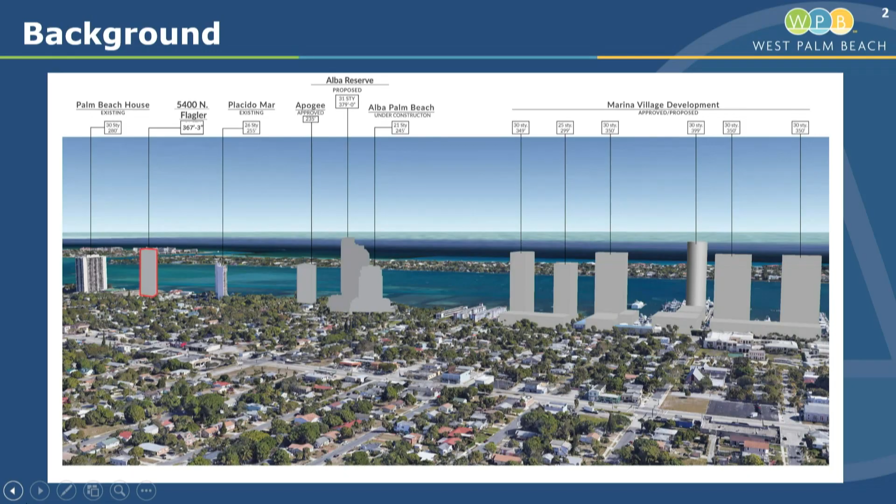Going back again to this slide, this is actually a great slide that shows the overall development along North Flagler Drive that's been going on for the last 10 years, and everybody's aware of the influx of the public coming to South Florida, specifically to this area of West Palm Beach. Staff has been diligently working with the Northwood Harbor Association, as well as the community and the city commissioners, to improve this area and make sure it responds to and answers all the neighbors' questions and concerns associated with the developments coming to this corridor along North Flagler.

So yes, the applicant is correct. We have some concerns regarding waiver number 3, and also the lack of active use along the frontage of North Flagler Drive. This is in line with the NOFOD, North Flagler Overlay District study that we've been conducting with the community. As you are aware, last night the City Commission unanimously approved the NOFOD Overlay District, making some limitations in regards to height, setbacks, buffering, massing, FAR, and so on and so forth. So as you'll notice, we have no objections with waivers number 1, 2, and 4.

Number 1 in regards to the minimum acreage, number 2 regarding the minimum area of the submerged lands, and number 4 in regards to the access points for the minimum separation distance. However, number 3 is a big concern for us, not only because of the upcoming development that was passed yesterday, which doesn't impact this project since it came in before this study was proposed and ongoing.

However, they were aware of the status that we're bringing this forth to the study, and we have had many conversations with the applicant regarding the height of the building and how it would impact the setbacks. In past developments, we have approved projects with substantial setback reductions on the north, south, and rear of the property, and some others on the frontage.

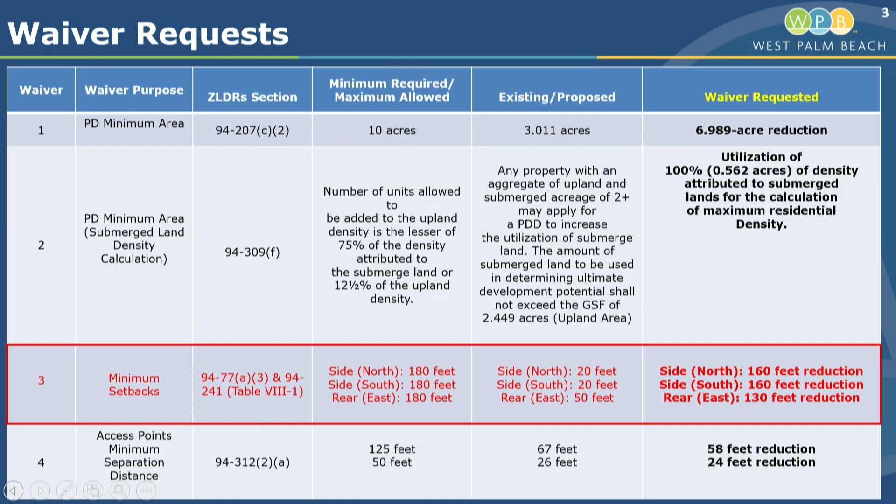However, Marina Village is 10 acres of land and has a cluster of several buildings at different heights. This proposal is over 3 acres of land, actually 2.44 acres of upland and half an acre of submerged land that they're requesting on waiver number 2. But yes, even though it's a large site, the request is still reaching the highest points of the proposed massing.

The FAR is also reaching the maximum, 2.98 if I'm correct, with 97 units, and a maximum height of 367 feet plus 20 feet of mechanical room, reaching 387 feet total height. So it comes in second place. We're not against the project itself, but we think it's important for the applicant to understand that they need to work with the city on these different concerns we've brought before them.

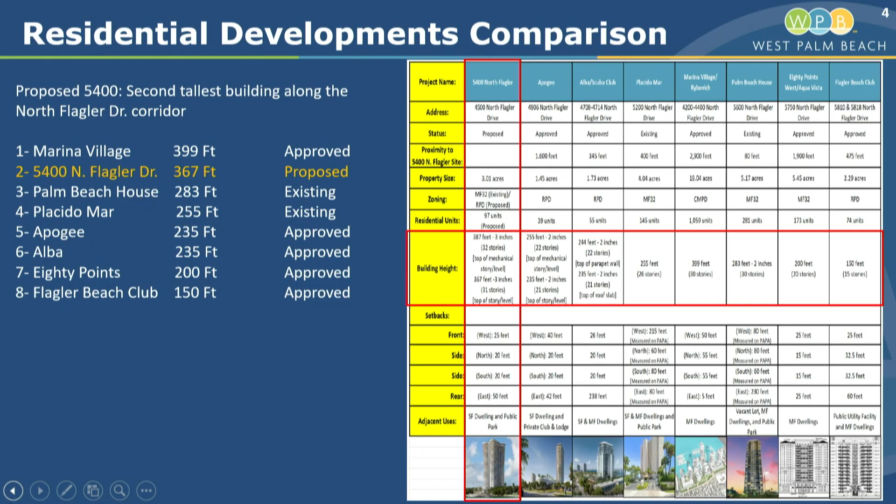Moving forward to the next concerns regarding the frontage of the proposed development, staff has specific concerns about the lack of active uses along the frontage at the ground floor. Unfortunately I didn't bring the other PowerPoint slide here, but basically all the back-of-house functions are being placed at the frontage of the building. You have the mechanical room, FPL, back of house, all facing North Flagler Drive, with no activation whatsoever for people to use. There's no gym, no residential units proposed to interact and connect the ground floor with North Flagler Drive, and where is the connection with the adjacent properties?

That's a question mark also. Also, the vehicular ramp, although the applicant states it's an architectural element bringing the outside in from the interior of the building to the front, it creates a major issue regarding noise, odors, dust, and creates an eyesore. And where is the activation of that ramp? There's going to be a lot of noise with cars going up and down, especially because of the valet parking located on the third floor.

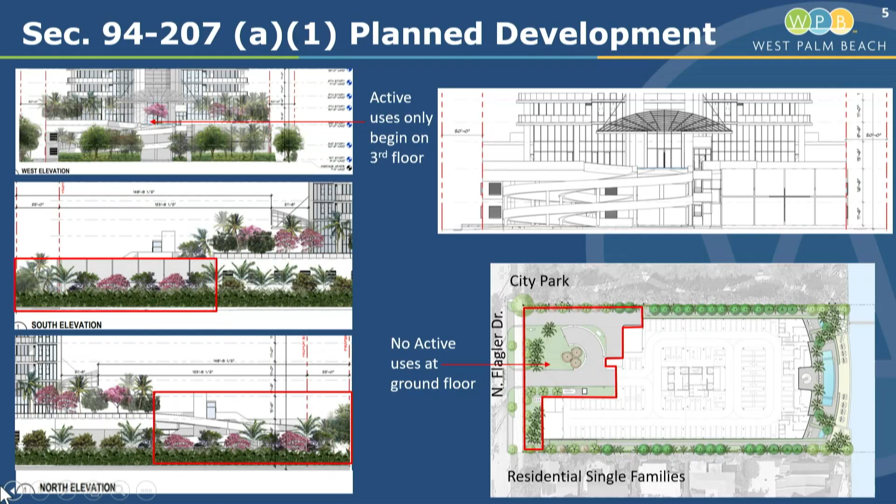Additionally, they are heavily landscaping that area to mask that infrastructure for a reason, correct? However, at the same time, this creates issues during the night. For example, you may have homeless people decide to stay under the ramp, or create issues in niches within that area that can be a problem in the future.

So staff believes they can work better, either masking that infrastructure with elements other than landscape that can answer staff's concerns about the structure, or even internalizing it in order to better create the connection between the front of the building, active uses, and pedestrians along the frontage. There's no connection; we don't see that going on in this project, at least at the frontage.

The verticality of the building, we agree. We don't agree with the height; we believe it exceeds the maximum height that we propose. But our main concern is the active frontage — the lack of active use at the frontage. Non-commercial, I want to make that very clear, non-commercial.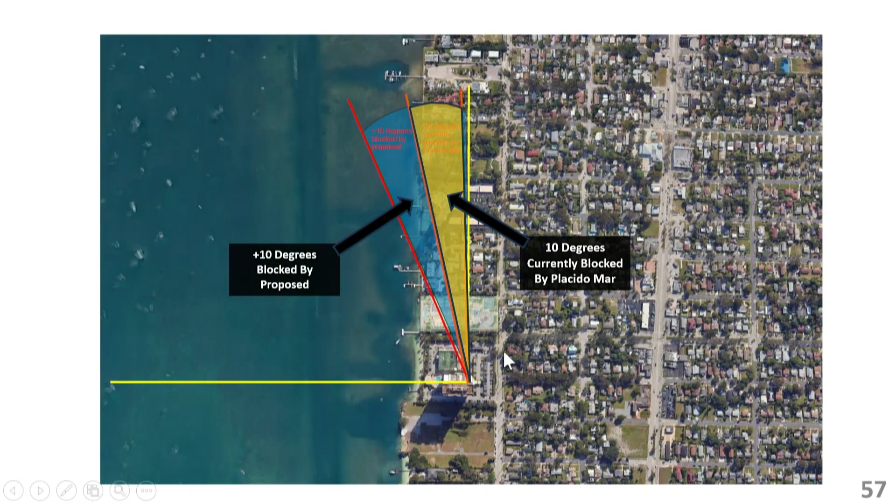And as some of the board members or folks told me, they would lose their view due south to Mar-a-Lago. Again, I just want to put on the screen what that would look like.

Also, just for a frame of reference, we did some studies. Here we are with a camera sitting at 1605. Here's what the view would look like with an overlay, a massing study, if you constructed that building consistent with the height. And then this is our proposal. We believe our proposal is better than what potentially could be built under the overlay.

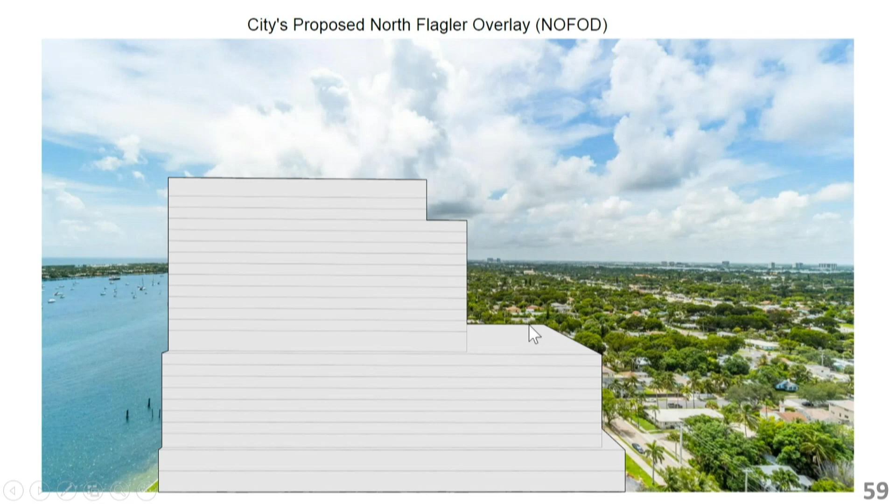I'd like to address one other item, which was that multi-use path, and how, sitting here as a landscape architect, we were having a lot of fun and came up with ideas where we could create seating areas. We can certainly activate that multi-use pathway.

Also, it's important to note the park to the north — the landscape is incorporated on purpose. We've incorporated the landscape into the park to the north, so we're certainly willing to continue working with staff on that. Thank you.

All right, we're going to bring it back to the board, and I'll start with you, TK. I just want to hear people's comments, and then we'll go for a vote.

TK, you can begin. I was just curious on a point made about infrastructure — the water infrastructure, the 50-year-old pipes. I just wanted to ask. Do you want to address that real quick, Ken? Yeah, thank you.

So are you going to overload our infrastructure? No, the answer is no. We have a capacity letter, number one. Number two, our engineers are here and they could talk about all the tests they did — I don't know those off the top of my head. But what I do know is existing today we have 72 units; our increase is 25 units from where it is today. Also, recognizing who's going to be living there, I think functionally there'll probably be less demand than what is there today. That was my point, thank you.

Yes, sir, all right, thank you. All right, so TK, you have the floor — your thoughts as we work our way down.

No, I thought the presentation was very well done. I appreciate the community outreach to the closest neighbors and to all the neighbors, so kudos to you. I commend the staff as well for working with them so closely, and the changes that have been made, and the back and forth. It's never easy, but I think the proposal we have today is thoughtful, fitting, a beautiful building, and I think it really would enhance the neighborhood. The height is important, but I'm okay with it, and I understand there's also a fiduciary responsibility of our board, so I would be in favor. Thank you. All right, Sam.

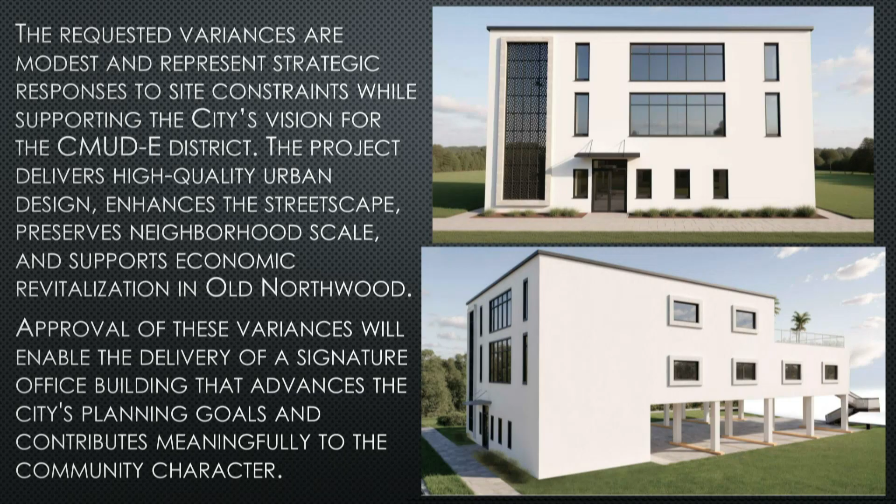Can I switch really quick to my presentation so you guys can see the plans? Thank you. You're welcome.

This is the one right here. Thanks for bearing with me, folks. There we go.

Go for it. Okay, so 2711 Poinsettia is right on the edge in the Currie mixed use. It's currently vacant - it's a residential property that's been used as an office building. Our surrounding uses are multifamily residential and office buildings.

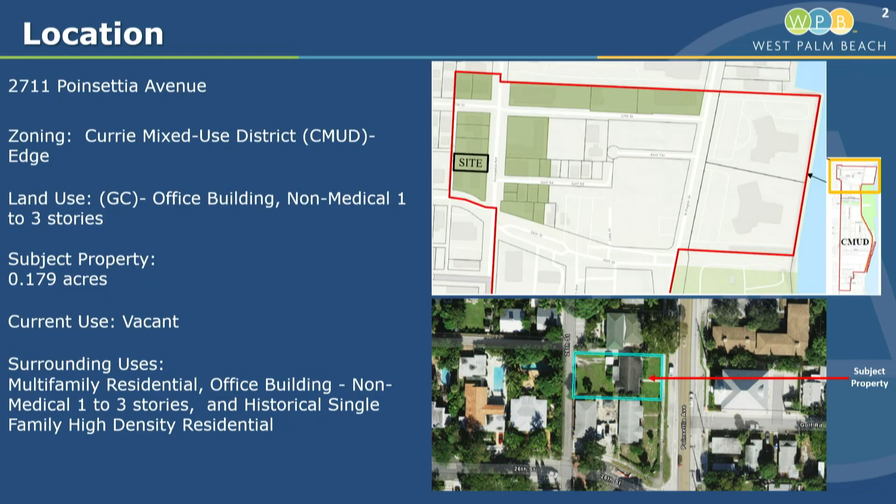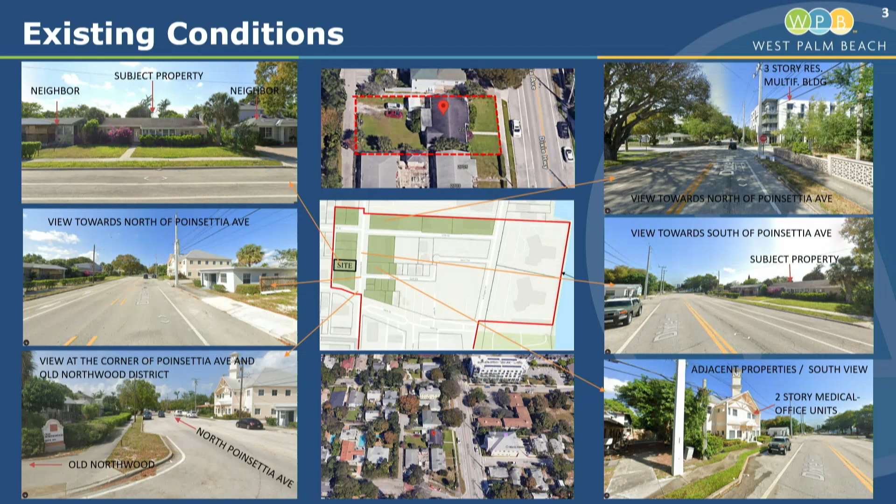You can see there's the subject property and surrounding areas. Our site plan offers 3 stories.

Rob, do you have anything to add to what we're doing? This is Robert Sameta, who's the owner.

Just my comments would be - if you don't mind, state your name for the record. Robert Sameta, Sameta Properties, I'm the owner of the property.

I think what we'd like to convey here today is that we've tried to work diligently with staff and planners to accommodate all of their recommendations, and I think we've landed at a place where we're in agreement, but we'll hear their comments.

I think the functionality for traffic and the accessibility to the site was the major concern of staff, and I think we've addressed that by now bringing the access point to the property from the back laneway, both in and out. To do that, because of the site size and some of the constraints of working on a small site, we had to adjust the landscape buffers and the laneway size to address that.

So I think we're all in agreement that that was the solution, and that's why we're here to gain your support. Okay, any questions of the applicant?

Just one question on the calculation for tabulating your parking, since I've been through this same process myself. Did you net out the areas that were not office use, like circulation and storage? Yes, that 7,452 would be leasable space. Only leasable space, that's actual office space, occupied office space. Okay.

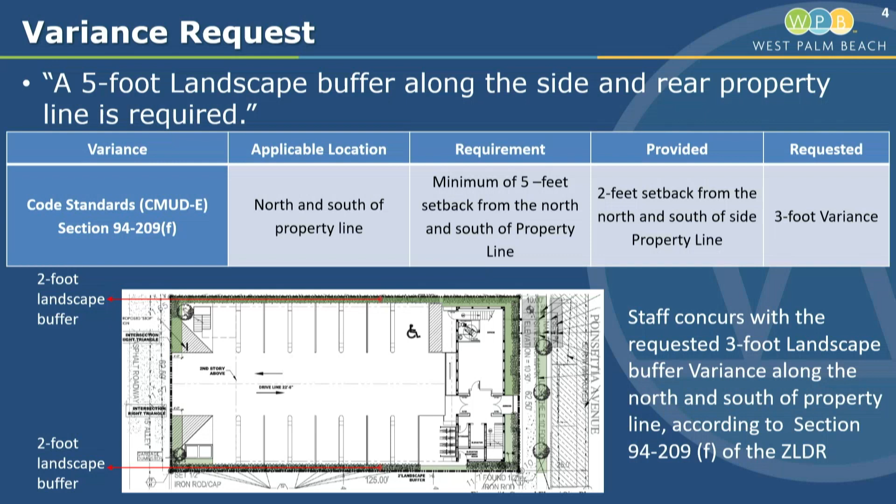Neither do we have issues with the required landscape buffer setback requirements that they're proposing to reduce to accommodate the parking spaces. Staff believes the articulation of the ground floor connecting, as you can see, there's an activation with an office at the ground floor. They proposed four bike spaces, when CMUD requires only 2, so they're going above and beyond what's required per code. They also propose a sort of T-turn, so you can actually turn your vehicle within the site. They provided this diagram indicating the auto turn, to show how the parking works and how the vehicular driveway functions within the site.

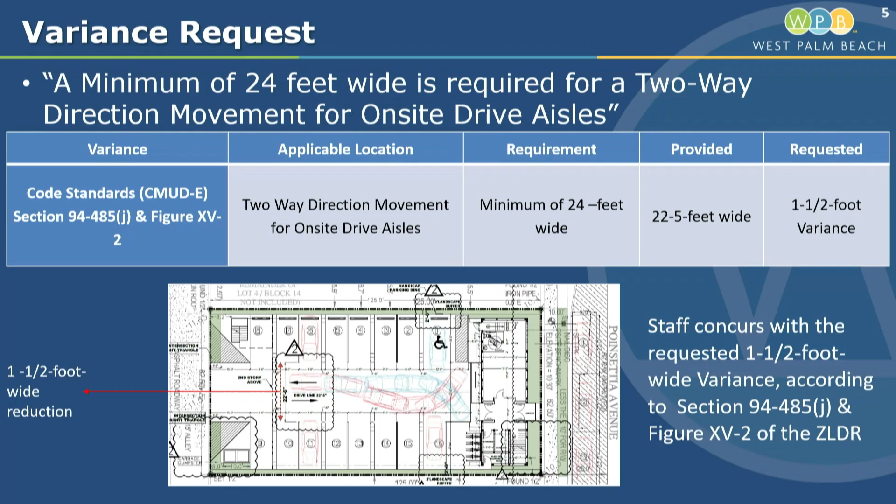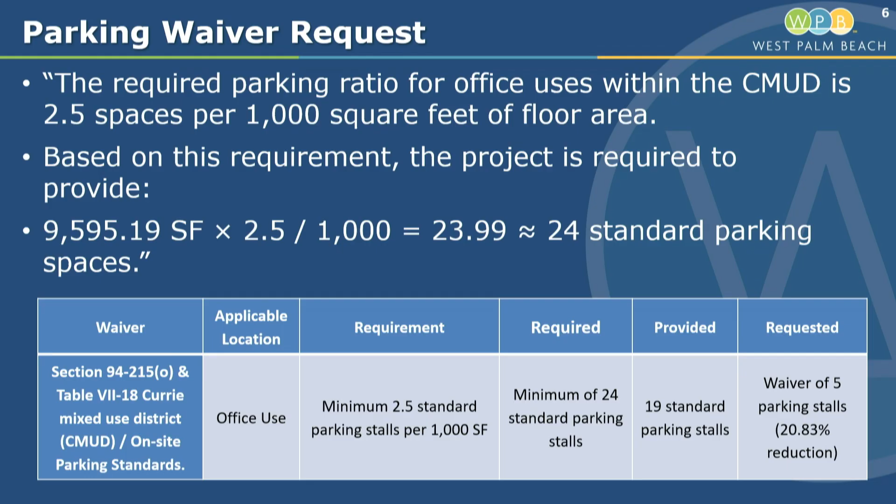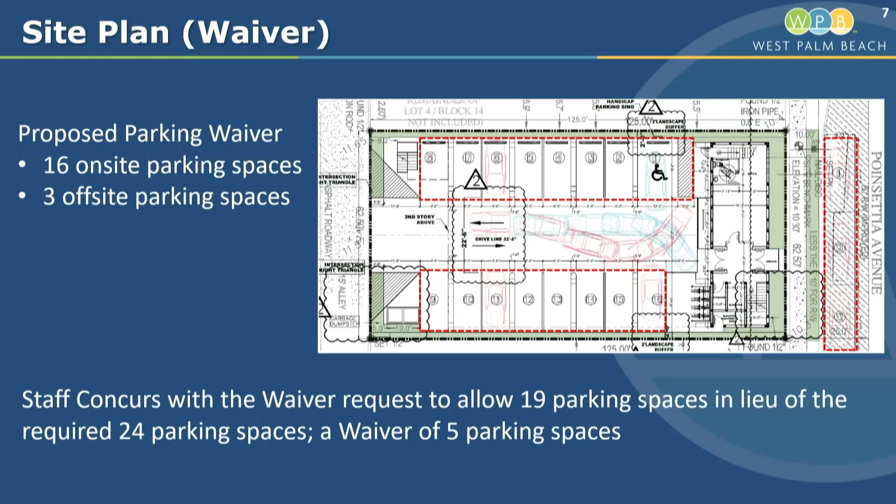I think it's pretty fair what they've done with all the site constraints imposed. So let me go to the next one. This is the parking waiver, which we already discussed. He said correctly that if he was going to calculate according to the net, they would actually meet the parking requirement, the on-site and off-site parking spaces, which is 19.

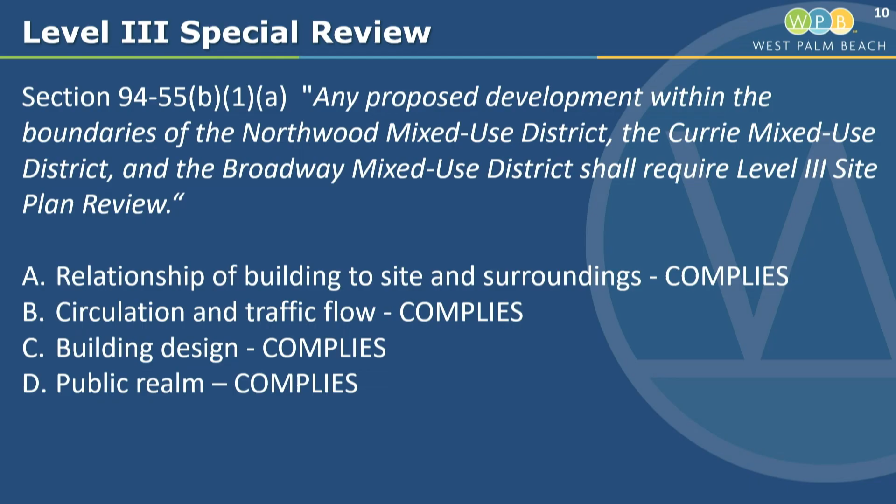Staff believes that the application complies with the variance standards, also complies with the waiver standards. And for the level 3 special review permit, staff believes the proposed development meets all the requirements of section 94-55B1A in relation to building site surroundings, circulation and traffic flow, building design, and public realm. Staff supports the request according to sections 94-38D6, 94-55E of the City of West Palm Beach Zoning and Land Development Regulations. Any questions, comments, concerns? Questions of staff? All right, thank you so much.

Does anyone have any concerns about this application? No. And if not, I'm looking for a motion for approval. Motion for approval. Is that the technical language you were looking for? I'll take Peter's job tonight. Motion for approval. We miss Peter, he loved reading those. All right, so the first one I'm doing is granting the variances, correct?

I move the planning board grant the variances associated with planning board case number 2018, a request by Robert Hollyman and Jared Kaufman of Logan Realty, Inc., applicant on behalf of Robert Cimetta of Cimetta Properties, owner, for the approval of a level 3 special review along with variances and a waiver to develop a mixed-use project known as 2711 Poinsettia Avenue, located within the Currie Mixed-Use District, CMUD Edge. This motion is based upon the testimony presented at the hearing, along with the application submitted and the staff report, which constitutes competent substantial evidence. The planning board hereby makes findings of fact that the application complies with each of the applicable criteria in Article 2, Section 94-38D6 of the City of West Palm Beach Zoning and Land Development Regulations.